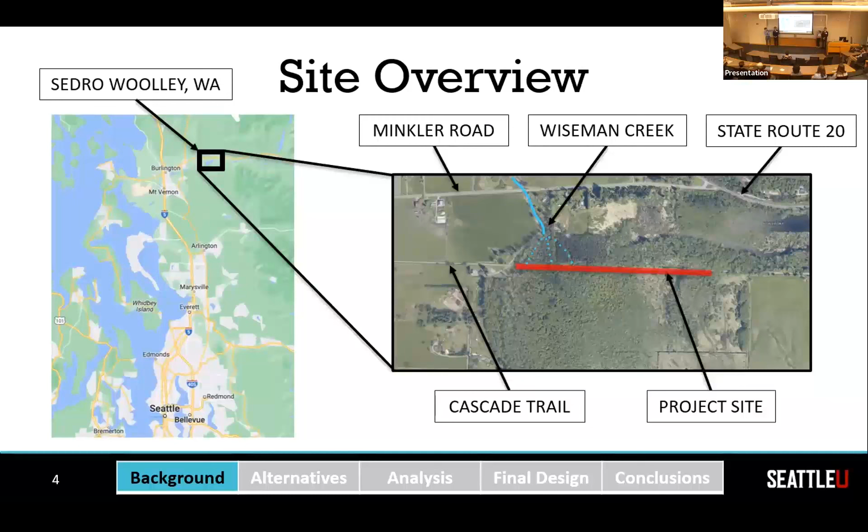So this is our site overview. So as you can see, it's near Sedro-Woolley, Washington, which is about an hour and a half north of here. And our project site is a 1,900-foot stretch of trail on the Cascade Trail. And Wiseman Creek, as you can see, runs through the Cascade Trail. And I'll talk more about that in the problem statement. And it's right by State Route 20 and properties on either side.

So these are our project objectives. So we analyzed literature and data to understand the problem. Then using that literature and data, we determined 4 final design solutions. We used an evaluation matrix to determine the best solution out of those 4, and then delivered 10% design drawings and a final report to our liaisons and Seattle University.

So this is our project roadmap. First, we had to understand the problem. Then we did a literature review and survey of the area. And in the literature review, we mainly focused on a 2006 feasibility study that went over our project site and talked about very similar things to what we were looking at. After that, we determined 4 potential solutions and created an evaluation matrix to find which one was the best. After we selected our preferred alternative, we made 10% design drawings of it and created a final report and deliverables for Skagit County and Seattle U.

So this is our statement of problem. So as you can see on the right, the trail is completely inundated with flow from Wiseman Creek. And when this happens, the trail is very inaccessible, and trail users either have to detour along State Route 20, which is a freeway, not too safe to walk along. They either have to turn back, which they complain about to Skagit County, or they continue through the flooded trail, which isn't preferred for the fish or for the trail.

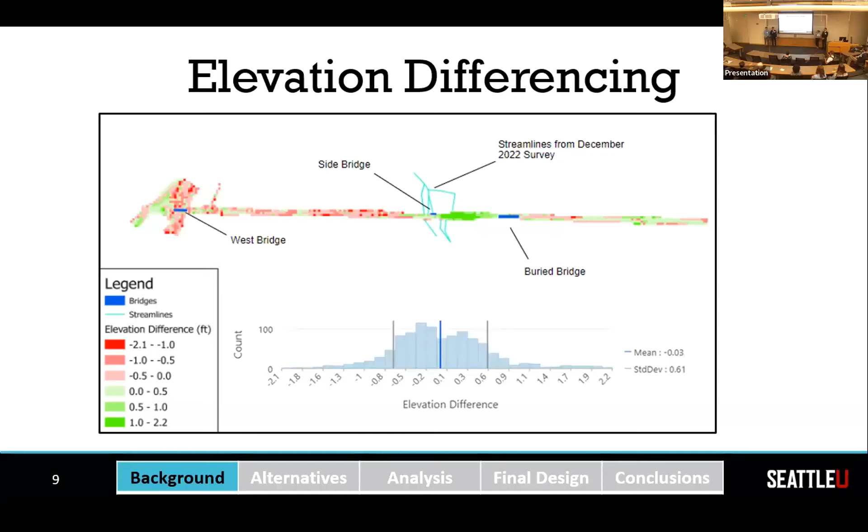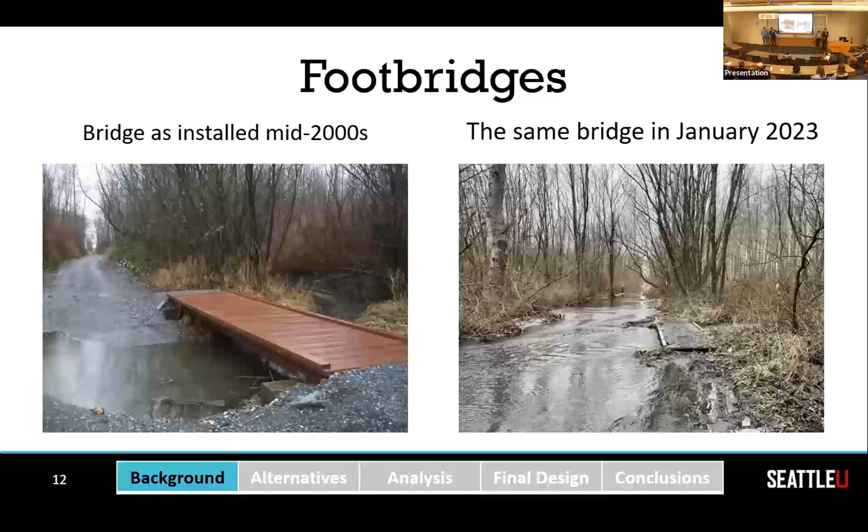And this is an example of that. So this bridge was installed in the mid-2000s. And at the time, it was an effective solution to cross this channel of Wiseman Creek. Now, when we came back in January 2023, that's that same bridge, and it's no longer providing access down the trail corridor.

So we came up with 4 proposed alternatives that could solve the problem. The first was no new action, just continuing as it is. The second is rerouting the trail. The third is raising the trail. And the last is a full boardwalk over the extent of the affected area.

So for the first alternative, we wanted to analyze the current state of the trail in order to compare our other alternatives to it. So this involves leaving the trail as it is, doing the maintenance that Skagit County currently does every summer, which involves regrading almost that entire section of trail. And trail users are detoured onto State Route 20 if they want to go around the trail. The habitat disruption from Wiseman Creek being channelized along the trail and from trail users moving through the sediment would continue to exist under this circumstance.

The second option we looked at was rerouting the entire trail to avoid the affected area. And this would involve going up onto Minkler Road and then either coming across on Highway 20 before cutting back to the trail or staying above the wetland area, but not on Highway 20 and coming back to the trail. This would require acquiring land or the ability to put a trail through there. And that was deemed difficult.

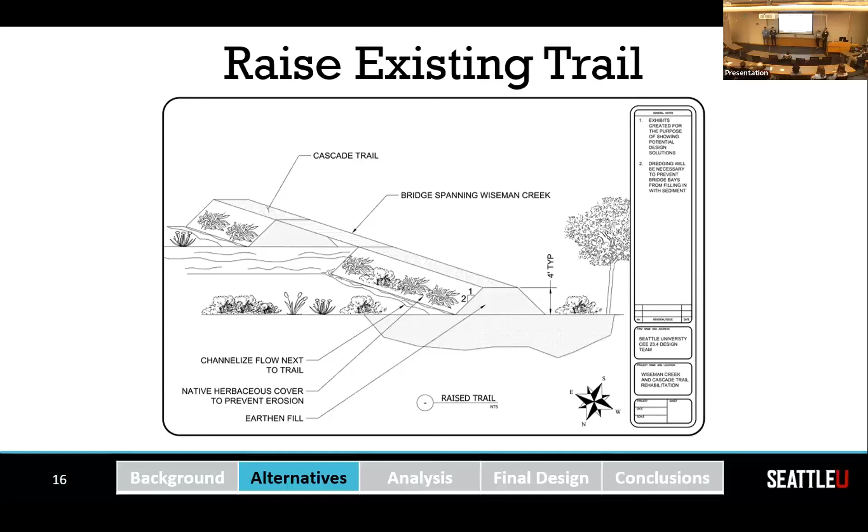The other option we looked at was raising the trail. Now this would involve bringing in soil to fill the area and bring the trail's elevation above both the sediment deposition over time and floodwaters, and creating certain channels with bridges over them that the creek could move through. There are issues that come up with channelizing the creek, and that's one of the problems that the salmon habitat is facing currently. So this solution doesn't necessarily solve all of the habitat problems.

Great. So now that we've talked about all of our different design alternatives, it's time to evaluate them. And we did this by using an evaluation matrix that has 6 different criteria on a score from 1 to 5, with 1 being a low score and 5 being a high score. So now we'll talk about some of those criteria. Constructability is our first criteria. Here we really want to make sure that whichever design alternative we select is easy to construct and doesn't require excessive land acquisition, any excessive heavy machinery, or extra support from exterior contractors.

Next up, we look at recreation and Zoom notification. Sorry about that.

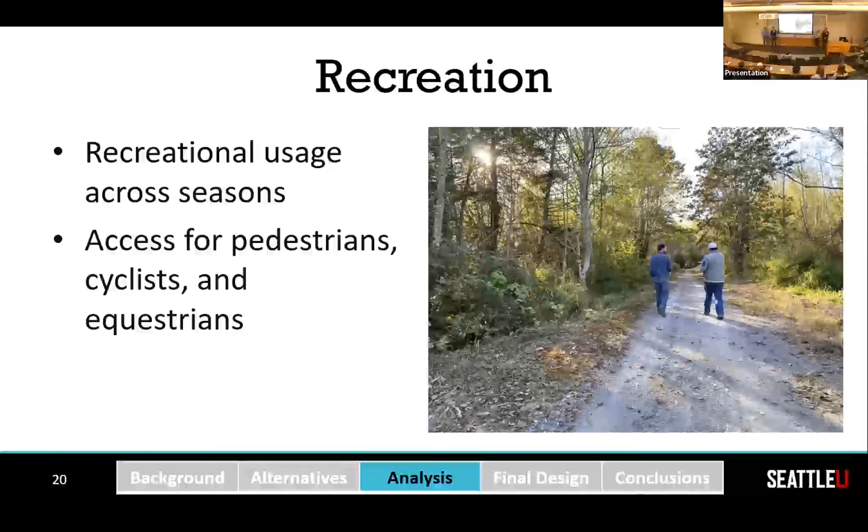Next up, we look at recreation, and here we want to make sure that the trail is accessible to all of our trail users, which include pedestrians, cyclists, and equestrian users. And we want to make sure that these trail users have access all year round. Next up, we're looking at environment. And here we want to make sure that we're restoring the Wiseman Creek alluvial fan region to its natural hydrologic functions. So one of the ways we can do this is by separating the trail and the wetland habitat.

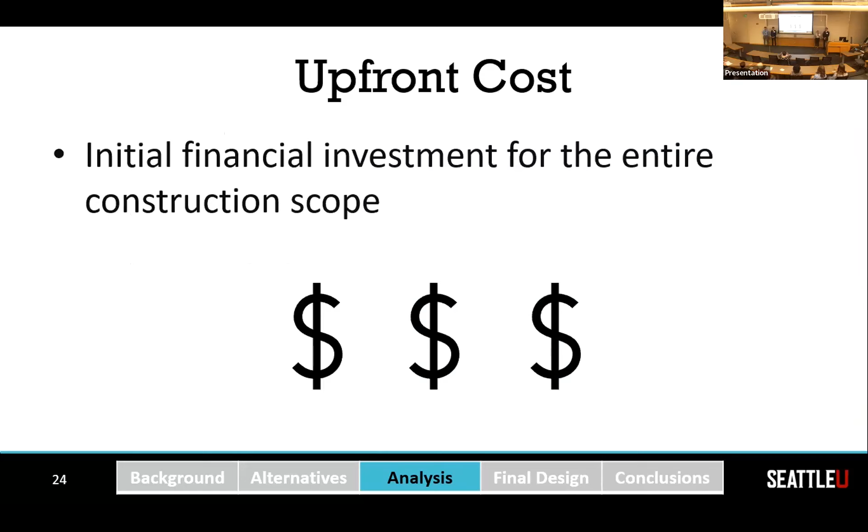Next up is longevity. And here we're looking at any expected future maintenance costs and also the expected lifespan of any of our designs. Then we have permittability, and this refers to the ease of obtaining permitting from any local, state, or federal government agencies. And finally, we have upfront cost, and this criteria refers to the initial investment required to actually build our design alternative.

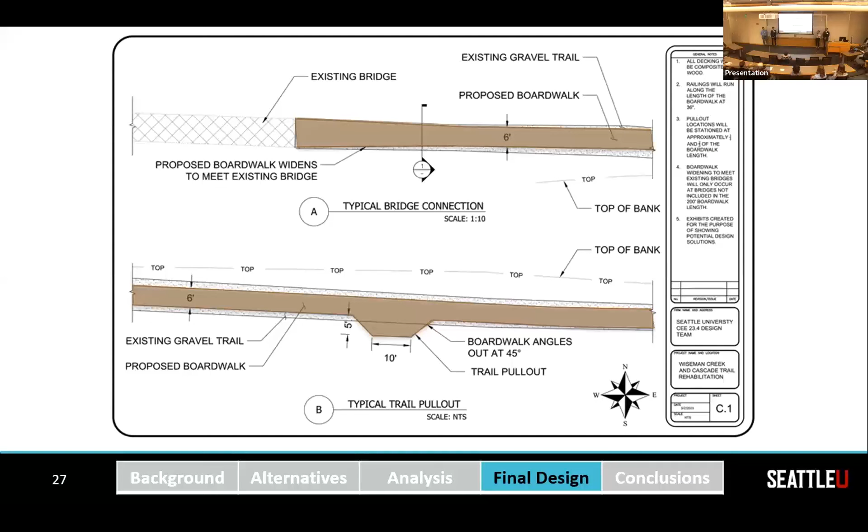So now that we've talked about some of our criteria, let's look at our design components. On the board here, you'll see the full length boardwalk, which we plan to be 6 feet wide, 1,900 feet long, and to have about a 30-year lifespan. In this plan view here, we considered a couple of design constraints, one of those being existing bridges that exist on both west and east ends of our proposed boardwalk. So to address this concern, we proposed that the boardwalk widens to meet the existing bridge.

Another concern we had is 2 equestrian users passing each other on our 6-foot wide boardwalk. We're not quite sure if they'll be able to squeeze past each other. So to address this, we had pullouts at 1/3 and 2/3 of the length of the boardwalk. That way equestrian users can pull off to the side and let each other pass safely. Next up, we'll look at a profile view.

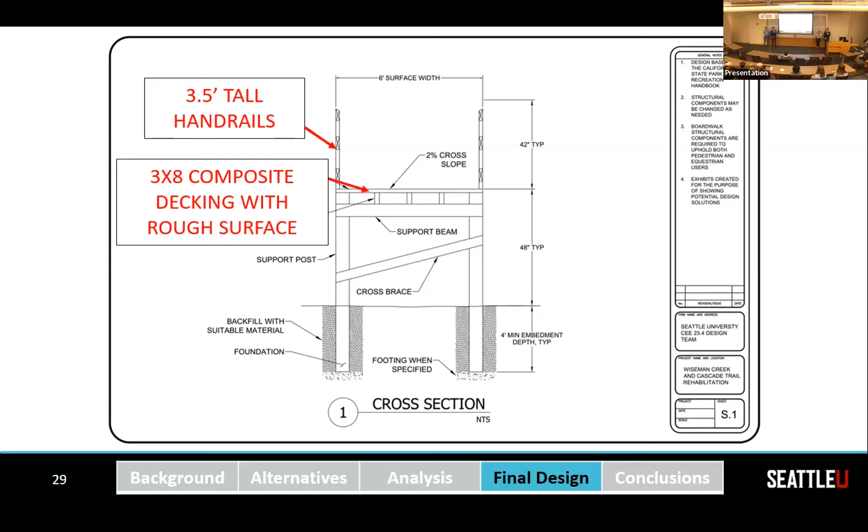And when we zoom into those supports and look at this cross section, you'll notice that we have 3.5-foot tall handrails for pedestrian safety. And we plan to use 3x8 composite decking that's rated for equestrian use and also has tractioning over the top. The roughening surface or traction is to prevent slipping during the wet season. And the rating for equestrian users just means that any equestrian users walking along the boardwalk don't have to worry about their horse's hooves punching through the deck. So that's important for safety as well.

You'll also see that we call out a 2% cross slope, and this is to help Skagit County Parks and Rec with any of their maintenance. So now that we've talked about some of our design components, I'll pass it off to Ryan, who'll talk about benefits.

So as we've recapped our design here, we look at the overall benefits for the environment. We looked at it mitigated the human impact on the salmon habitat, and it also allows the alluvial fan to function naturally. For recreational use, this provides year-round access throughout the trail corridor for pedestrians, cyclists, and equestrian users, and it prevents users from needing to detour around to Highway 20, which is a safety concern.

Additionally, this solves a long-standing issue within Skagit County. The feasibility study we talked about earlier was conducted in 2006, and there was no preceding action. So this has just been a lingering problem that we were hoping to solve here.

So now to look at how much this thing costs, we looked at 32 observations of other wetland design boardwalks. We then found an average cost of $710 per lineal foot, which we applied to the full length of our boardwalk, which gives us this cost of $1.4 million. After applying a 30% contingency, we then see an estimate of $1.8 million.

As for maintenance cost, the current trail conditions that Skagit County is doing is requiring about $9,700 per year on average to just brush the trail and regrade it, which they do every year. With the addition of the boardwalk, this then changes to $11,400. However, there is no more need for the trail to be regraded as people are just walking over the top of the wetland.

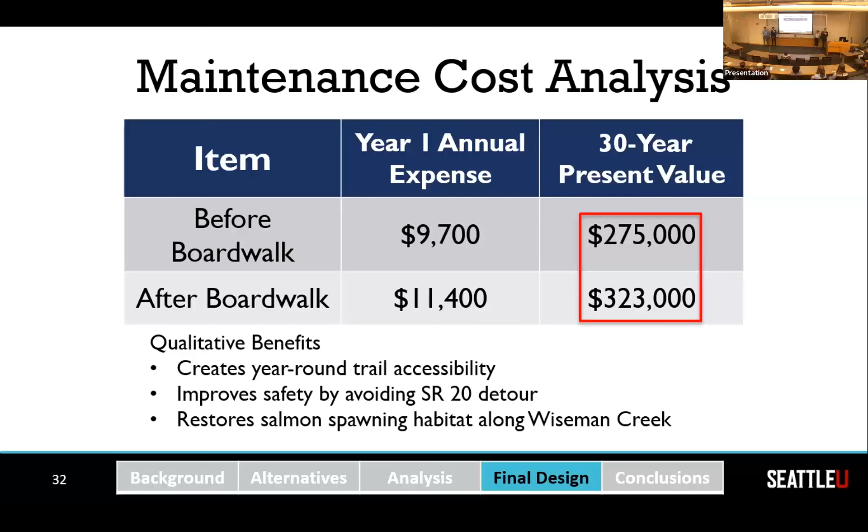Our 30-year present values are shown here. So before boardwalk, we are looking at $275,000. And then afterwards, this increases to $323,000. Now, these numbers do not reflect the qualitative benefits that we do get from having the boardwalk, which are the recreational benefits of having year-round accessibility along the trail corridor, as well as improving the safety by avoiding the State Route 20 detour. And finally, ideally restoring the salmon spawning habitat along Wiseman Creek.

So for further development, we have delivered this to Skagit County to aid in the acquisition of grants and other funding to accompany the cost of the boardwalk. We then had discussions with their liaisons about working with potential partners such as Washington Trails Association, Skagit Trail Builders, and Skagit Whatcom Island Trail Maintenance Organization to help reduce the cost. And furthermore, we looked at potentially making this trail an adopted trail, which would also help to alleviate some of the additional maintenance cost. And that is all we have.

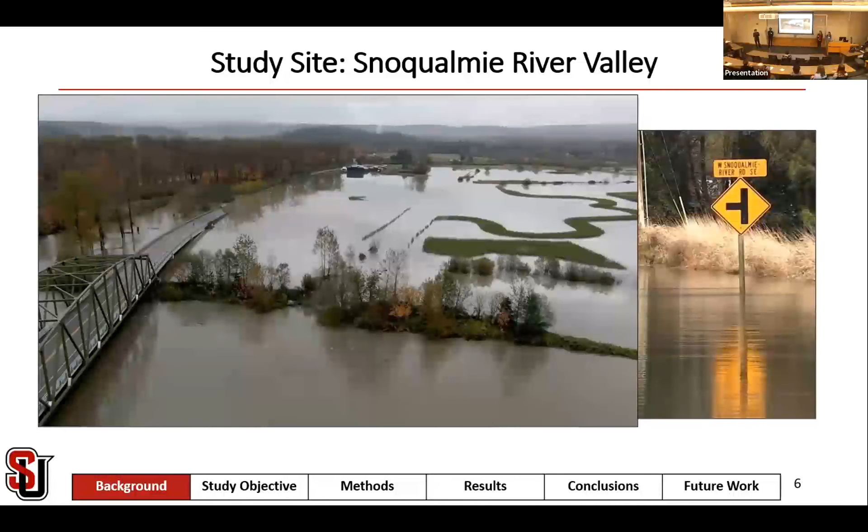While this is really useful information for users, it does have its limitations, as flooding information is only available at gauge locations, meaning that users who do not live right next to a gauge may have a difficult time discerning how a flooding event is going to affect their property and their livelihood.

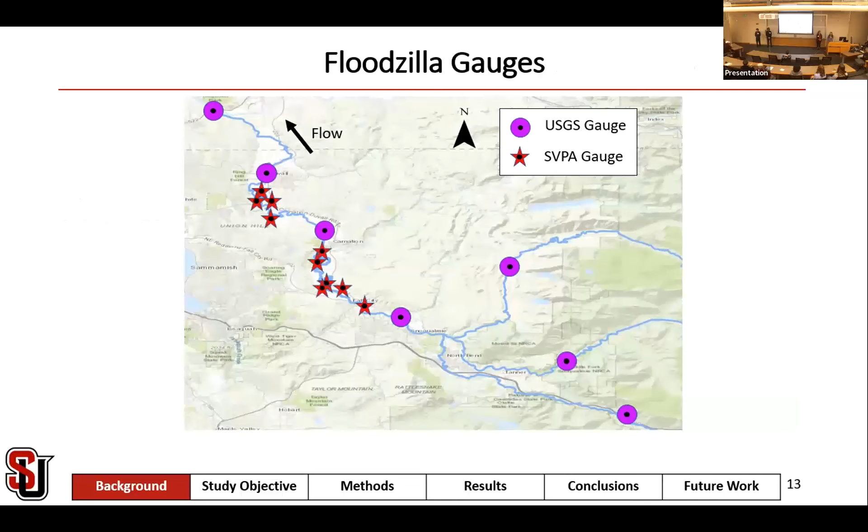Thank you, Ruby. And SVPA uploads water level and flow rate data from 7 gauges, which are owned by the United States Geological Survey, or USGS. In addition to that, SVPA also owns and operates a series of 10 active gauges, which utilize ultrasonic technology to record water level in the valley.

Currently, SVPA has a preliminary screening algorithm, which will flag and remove data points when the water level is recorded to change at a rate above 2 feet per hour. SVPA defined this parameter based off their observations that water level readings recorded at their gauges typically do not exceed this rate. Although this screening algorithm has helped SVPA to flag data, it does not adequately capture erroneous readings caused by an obstruction between the gauge sensor and the ground surface, such as a tree log, spider webs, or Seattle University students on site, as you can see pictured.

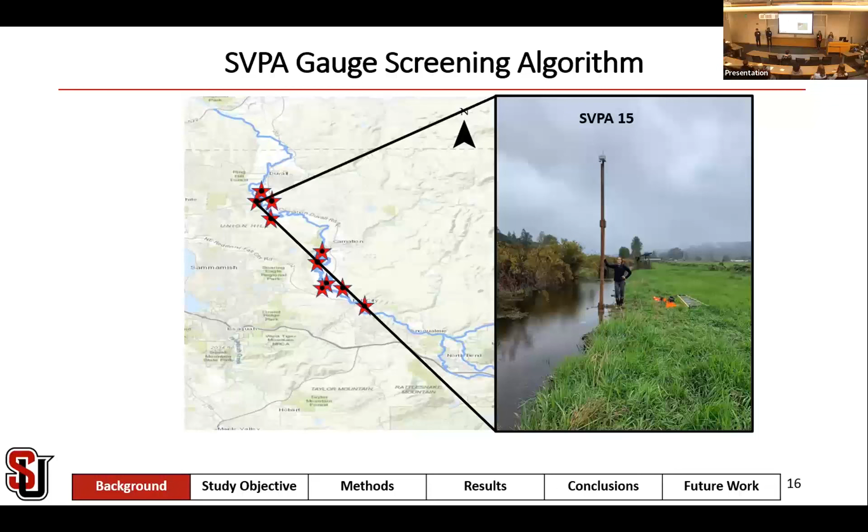Furthermore, there is evidence of valid water level readings which change at a rate above 2 feet per hour, such as when a flood crests and flows quickly into a drainage ditch, which is often the case for our SVPA 15 gauge.

For the screening algorithm, we implemented 3 parameters from USGS, first of which being range, or checking whether or not a given data point falls within the natural boundary for a gauge. Second of which being rate of change with minimum and maximum values. And third being consistency checks with adjacent gauge readings. Sean will now go into a bit more detail in the coming slides about how this all works.

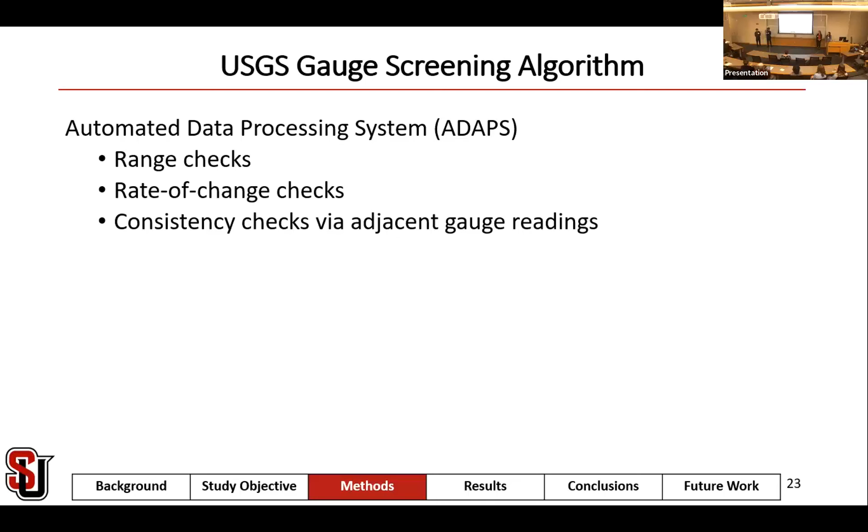So as Owen mentioned earlier, we will be implementing USGS's 3 methods of screening their data onto our sponsors' gauges as well. Here we have a rough outline of the flow chart that our algorithm will seek to take, and we will be explaining the particulars of it in the slides to come.

Here we have the 3 basic parameters that we will be implementing, starting with a check for minimum and maximum water elevation checks for the gauge's historical readings. When a point passes through that parameter, it is then checked to see if it lies within the minimum and maximum rate of changes that we've established at each gauge. If it passes that as well, then we will compare it to an upstream USGS gauge to make sure that our sponsor's gauge readings make sense in the context of the whole river.

When a point succeeds in passing through that parameter, we then go into the minimum and maximum rate of change checks. For our maximum rate of change, we have decided to keep our sponsor's existing 2 feet per hour parameter as our maximum, as it is historically proven to capture erroneous data without capturing too much publishable data as well. For our minimum rate of change, we will be selecting to look at data points that represent a rate of change of 0 feet per hour from the previous point.

Therefore, to effectively compare the 2 gauge readings, we had to determine the average time lag between when a max stage is recorded at both gauges, which we denote as delta T, as well as the average height difference between peak stages at both gauges, which we denote as delta H, which is due to the difference in datums that the gauges have. We calculated delta H and delta T values based on a variety of flood magnitudes to ensure we had representative parameters of multiple flooding events. After which, we shifted up our USGS gauge based off the delta H and delta T parameters to create what we like to call an SVPA predicted value. Now, all incoming stage data will be compared to this SVPA predicted value.

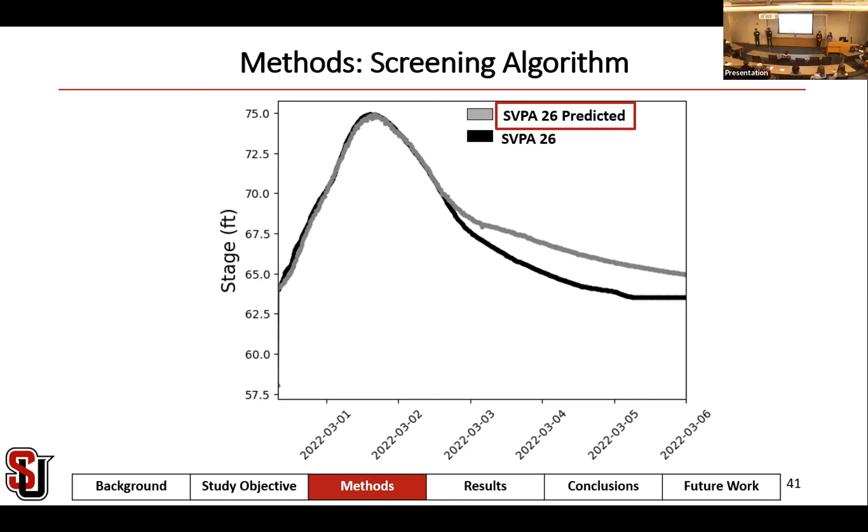So going into the methods for our inundation map development, we'll be using ArcGIS to compile a HEC-RAS water surface elevation map and subtracting from that a LiDAR ground surface elevation map so that we can make a more defined river depth map for any given flood event. Ruby will now go ahead and explain how we went using HEC-RAS in this project.

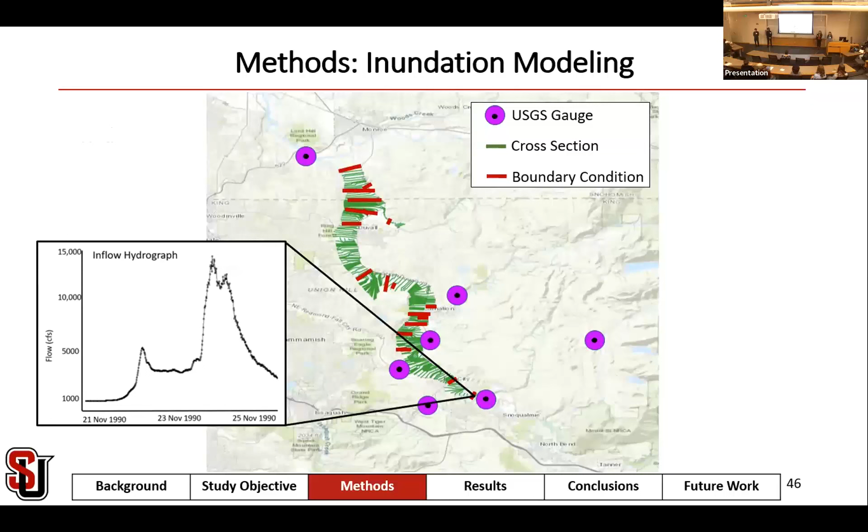Each of these boundary conditions requires an input hydrograph, either an inflow hydrograph, as shown here, which shows flow data from USGS in respect to time, or alternatively, a stage hydrograph, which shows stage data in respect to time. Now, when the model was originally created for these 21 boundary conditions shown here, the necessary stage and inflow hydrographs were determined using data from these 7 USGS gauges. However, since 2004, 2 of these gauges have gone offline. So in order to rectify that, we've gone ahead and added an additional gauge, the USGS 22 Carnation gauge. So now when we run the model for these 21 cross-sections shown here, the necessary stage and inflow hydrographs are created using data from these 6 USGS gauges.

The floods that we modeled in HEC-RAS have been used to create inundation maps or flooding maps. And those flooding maps have been compiled into an inundation map library. We reference these maps to the flow recorded at the USGS Carnation gauge. We chose this gauge because it is midpoint between the upstream and downstream boundaries of the Snoqualmie River and has historically experienced the highest inflows.

Many of the floods that we modeled have been based off historical and frequency analysis, based off the annual peak flooding events that have occurred at the USGS Carnation gauge. We use that frequency analysis to create 1 through 100-year return flooding events. We have also modeled in HEC-RAS historically large flooding events that have occurred in the valley, which SVPA has uploaded onto their Floodzilla website.

Now we will go into our results. For the screening algorithm, we performed a correlation analysis on the SVPA and SVPA predicted hydrographs. We found a very strong relationship, especially above the minimum stage values. Now we performed this for each gauge, and we can use this to prove how we're able to check consistency against adjacent gauge readings using this relationship.

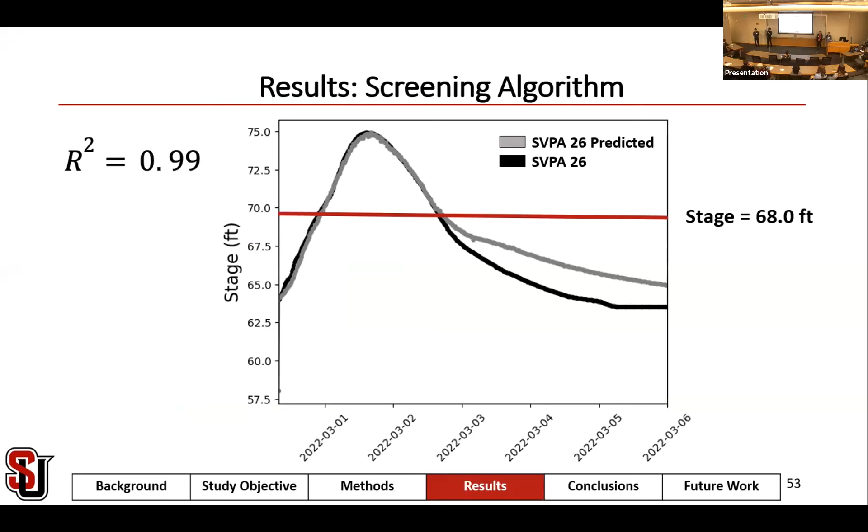This makes up roughly 40% of SVPA 25's flagging efforts. So we are happy to be able to provide that much reduction in our sponsors' workload.

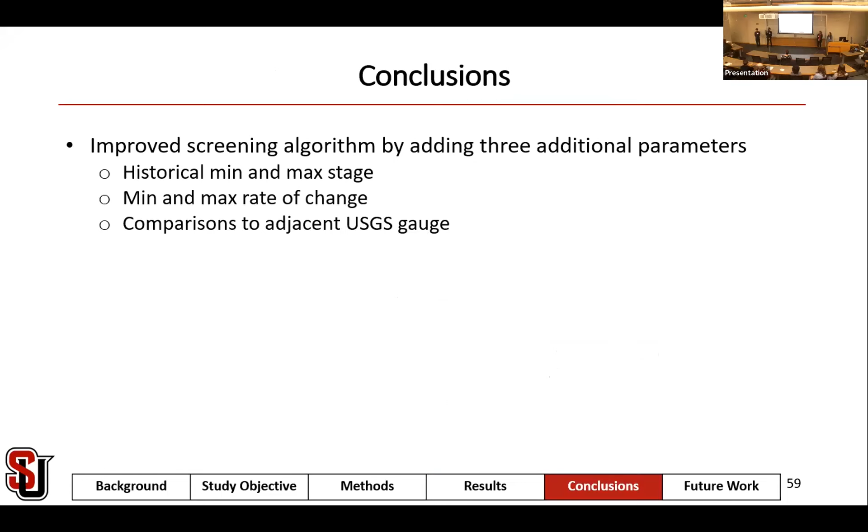In conclusion, we have improved the automated screening algorithm for SVPA by implementing 3 additional parameters, including historical minimum and maximum values, minimum and maximum rates of change, and consistency checks with adjacent USGS gauge readings. In addition to this, we have also provided a way to visualize flooding events to residents in the Snoqualmie Valley through the creation of inundation maps, which display the extent of flooding events. And we have developed a script to make it easy for SVPA to implement this in an automated process.

And now moving into future work, in 2017, King County adopted the 1D HEC-RAS model that we use throughout this project. In the spring and summer months of 2023, King County is working on developing a new 2D HEC-RAS model of the Snoqualmie River. This new model would include updated topographic surveys and hydraulic analysis. We bring this up as we think it's important to know that the methodology that we have developed throughout this project can still be applied to this new 2D model. This would allow SVPA to create new and updated flooding maps to be displayed on the Floodzilla site.

Sweet. Thank you, and now I think we have some time for some questions.

One question I had was on the flooding mitigation map. Was I understanding that you took a gauge kind of in the middle of the valley and applied that to the HEC-RAS model from downstream to the upstream end? In other words, does that consider the floodways, the rising land, falling land?

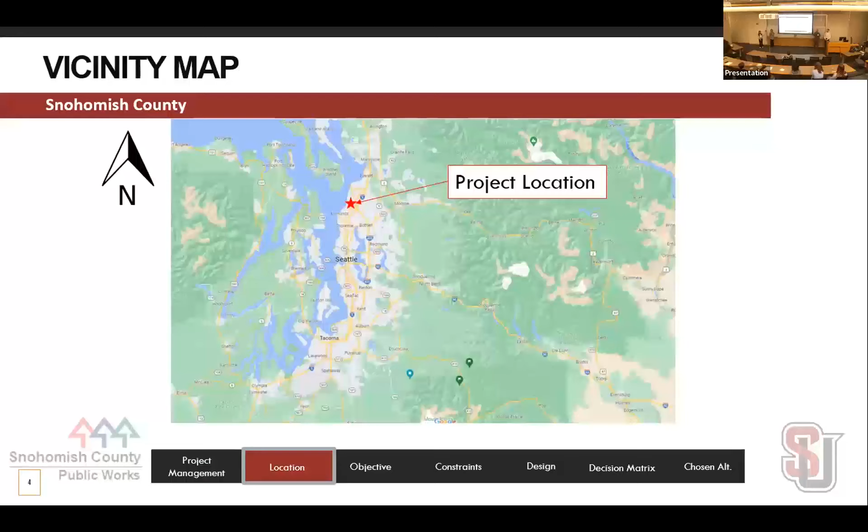Here's a picture of our project site, which spans about 600 feet between 164th Street Southwest at the north end and Lynnwood city limits at the south. This roadway leads access to amenities and buildings, including Meadowdale Townhomes, St. Timothy Lutheran Church, which is also a preschool, Sunquist Family Nature Park, and Beverly Elementary School.

And at the south end of our road, it features an earthen dam as well as a regional detention pond. So this part of road is actually built on top of a berm. Right under the road, there's also Lunds Gulch Creek, which flows through a culvert in this section of road.

Our project objective was to provide Snohomish County with a preliminary pedestrian improvement plan for 52nd Avenue West to address the lack of pedestrian facilities on the west side of the road. And this will include 4 different design alternatives, including one no-build option, as well as the selection of a preferred alternative based off of Snohomish County's recommendations and our engineering knowledge.

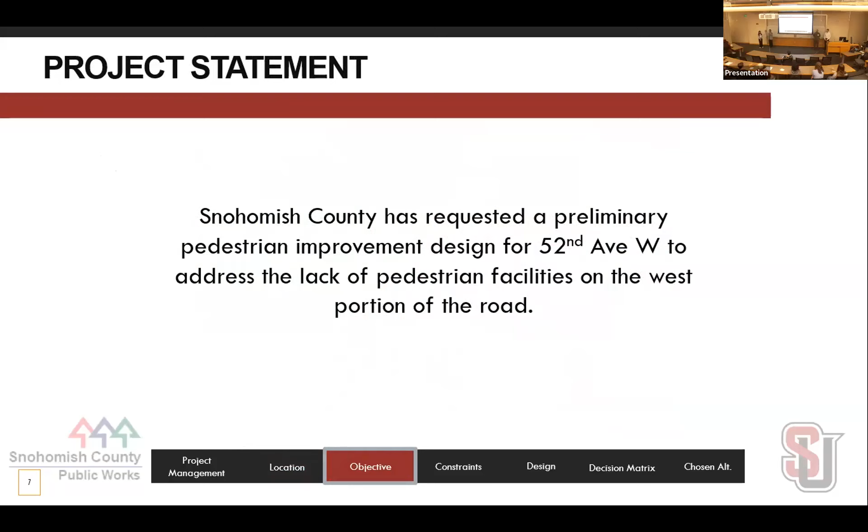So here's our project site again. 52nd Avenue is classified as a minor arterial road, which is characterized by a posted speed of 35 miles per hour and medium to high vehicle capacities. So here are our current conditions. Right outside of our project site is where the sidewalk ends pretty abruptly at the north and south end of our project site. So this would leave just the west shoulder for both pedestrians and cyclists to travel through, along with oncoming traffic.

Some limitations we need to consider in our project include the earthen hill along the Sunquist Family Nature Park, where this hill is only allowed to be excavated within right-of-way limits to create enough space to construct a pedestrian facility. Another constraint we need to consider is the culvert near Lunds Gulch Creek, which exists 20 feet below the existing shoulder, and this area must remain undisturbed as much as possible.

The third constraint we need to consider is the earthen dam, located at the southern portion of the site, which is part of the Lunds Gulch Regional Detention Pond, and this area must remain undisturbed as well. As for our project scope, we'll have to deliver a 30% design report to develop a pedestrian improvement plan with 4 design alternatives, which is a culmination of all of our tasks and deliverables we've been working on this past year.

As for our basis of design, we utilize the Engineering Design and Development Standards, the Washington State Department of Transportation, and the American Association of State Highway and Transportation Officials to comply with all design standards for drainage, utilities, pedestrian facilities, and wall designs.

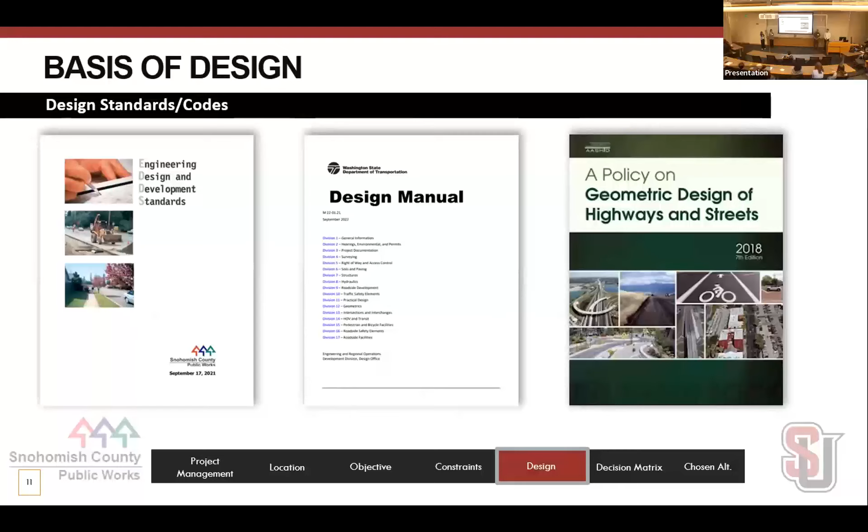Title VI applies to inform everyone within the community, to accommodate the needs for the Americans with Disabilities Act, non-English speakers, and to provide environmental justice.

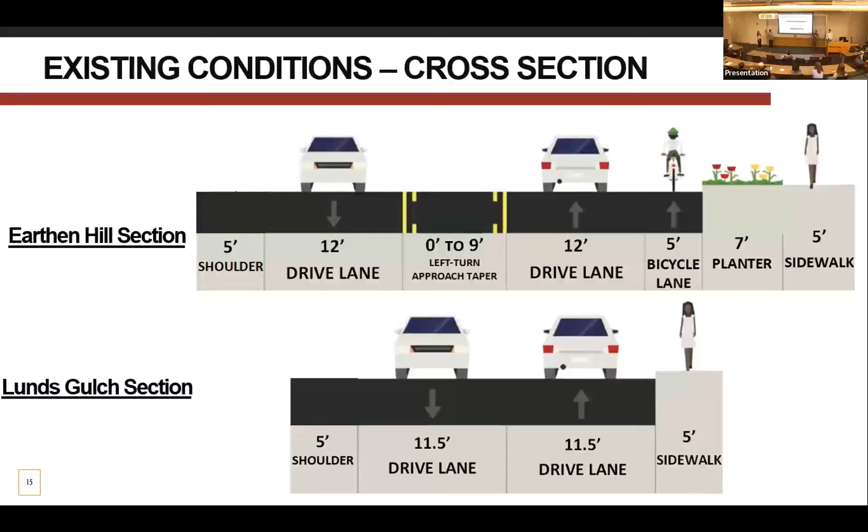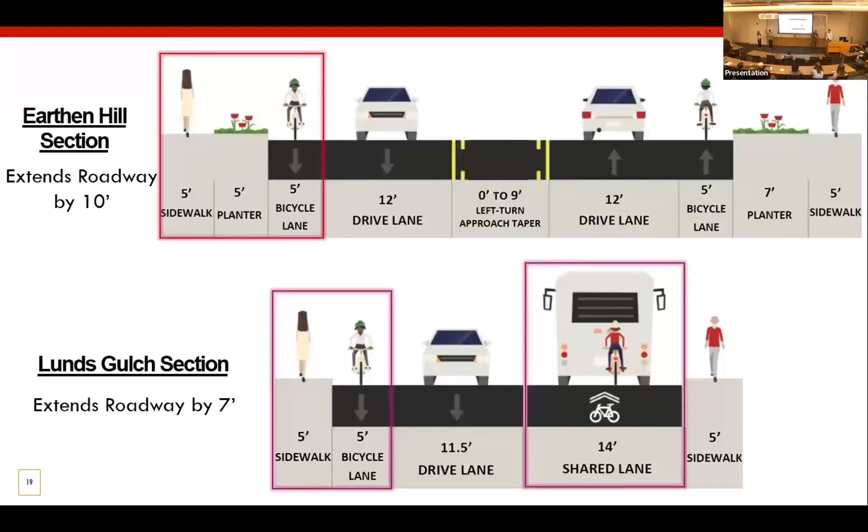For alternative three, it's very similar to alternative two, except on the east portion of the roadway, we'll be adding this bicycle facility that starts at the Lynnwood city limits. So as soon as bicyclists enter Snohomish County, they'll be able to enter a designated bicycle facility all the way heading northbound. And then on the east portion, we'll still have that bicycle facility. So a bicyclist could come from 164th Street all the way to Lynnwood City and to Beverly Hill Elementary School.

And then also we would have that bioretention planter strip between the sidewalk and the bicycle facility at the Earthen Hill section. And then the sidewalk will continue all the way to Beverly Hill Elementary School.

And then this is the alternative three cross section. So for the Earthen Hill section, we'll be replacing the shoulder with a bicycle lane, planter strip, and sidewalk, extending the roadway by 10 feet there. And then at the Lunds Gulch section, we'll be adding a 5-foot bicycle facility on the east side of the roadway. And then the shoulder on the west side, we'll be replacing with the sidewalk and bicycle lane. And then we'll extend the roadway by 7 feet.

So for our fourth and final alternative, this is going to be our no build option. Basically the project site will remain as is. However, this will not meet any of the requirements set forth by Snohomish County to add a pedestrian improvement plan for the west portion of the roadway.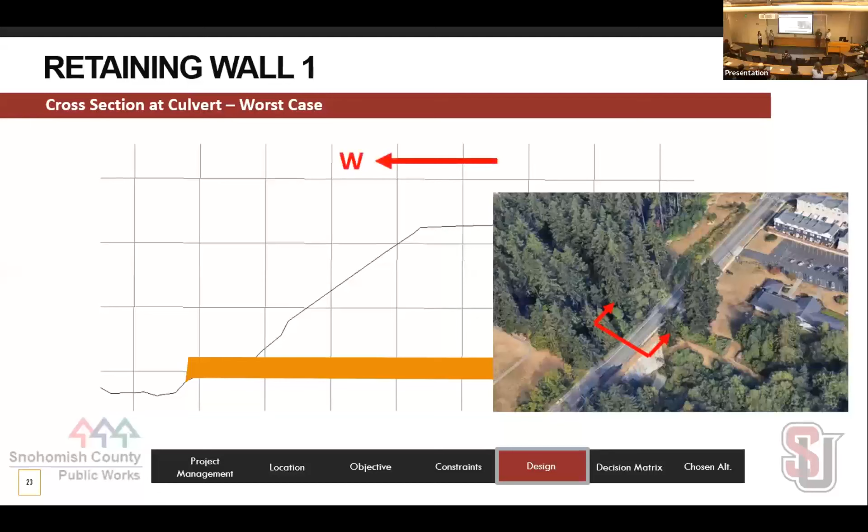Thank you, John. This is an existing roadway cross section at the Lunds Gulch Creek area. And in order to provide improvements to the west side, we will have to go over that existing slope that's there. So we propose adding a geogrid reinforced wall to mitigate the impacts on that culvert and the Lunds Gulch Creek that flows through that culvert.

So that will require a partial excavation of the hill and then construction of a geogrid reinforced wall with geogrid reinforcing in between the layers. And the improvements will be built on that geogrid reinforced wall, and it will be a 6-to-1 slope. And this is a photo of approximately how the wall will look after it's constructed.

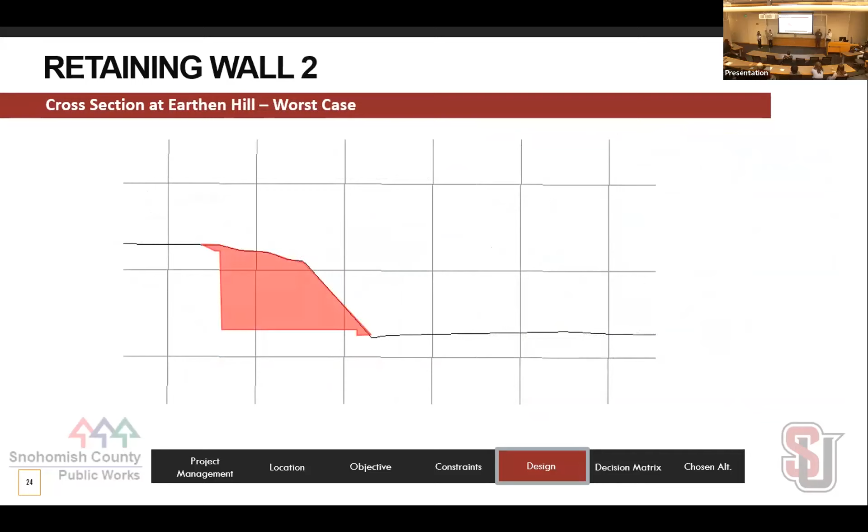So our team created a decision matrix tool to select a preferred design alternative for a pedestrian improvement plan, which is based on 5 categories, and that includes environmental impacts, cost of improvements, pedestrian and bicycle facilities, and meeting standards from the county's minor arterial cross-section.

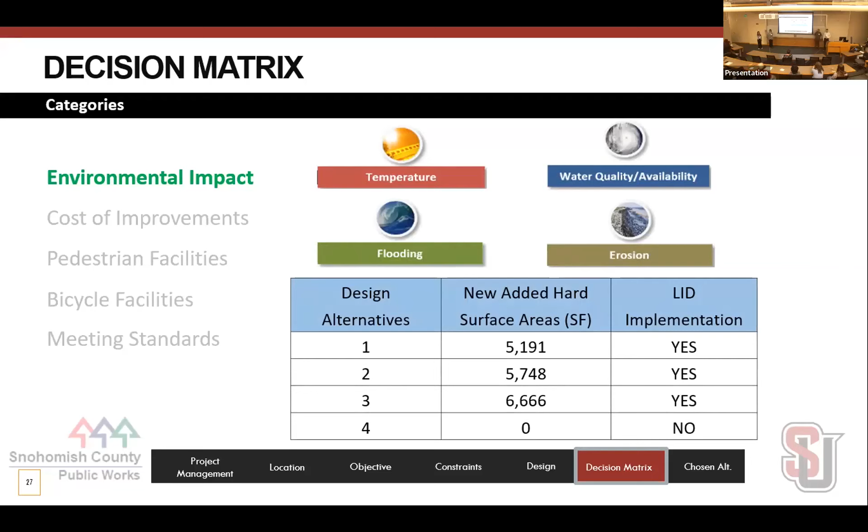And to analyze environmental impacts, we utilized the climate change tool to examine changes in temperature, water quality, flooding, and erosion impacts. The climate model projects an increase in temperature, stream flow volume, sea level rise, and landslide hazards. And based on this table, design alternative 3 has the highest amount of new added hard surface area, where low impact development best management practices will be implemented to minimize erosion impacts.

For the cost of improvement section, we utilized the Washington State Department of Transportation unit bid analysis, which basically looks at historical prices of construction items that WSDOT used in past projects. And with this cost analysis, we found that alternative 1 will cost $1,244,000. Alternative 2 will cost $1,326,000. Alternative 3 will cost $1,416,000. And alternative 4, which is our no build option, does not have any costs associated with it.

For our pedestrian facilities, we looked at the number of pedestrian facilities added and also the separation from the roadway of those pedestrian facilities. For the bicycle facilities, we looked at the number of bicycle facilities added and also the separation from the traveling roadway of those facilities. For the meeting standards category, we just looked at the number of deviations from the standard minor arterial county cross-section that we looked at before.

So with this, we developed a decision matrix. It's a lot to take in, but you can see alternative 3 comes out on top. This is our alternative with the sidewalk, the planter, and the 2 bicycle lanes. And it scored the highest because it has the most pedestrian facilities, the most bicycle facilities, and it meets the most standards. And although it does have a higher environmental impact, there's not much difference between the other 2 alternatives in terms of environmental impact.

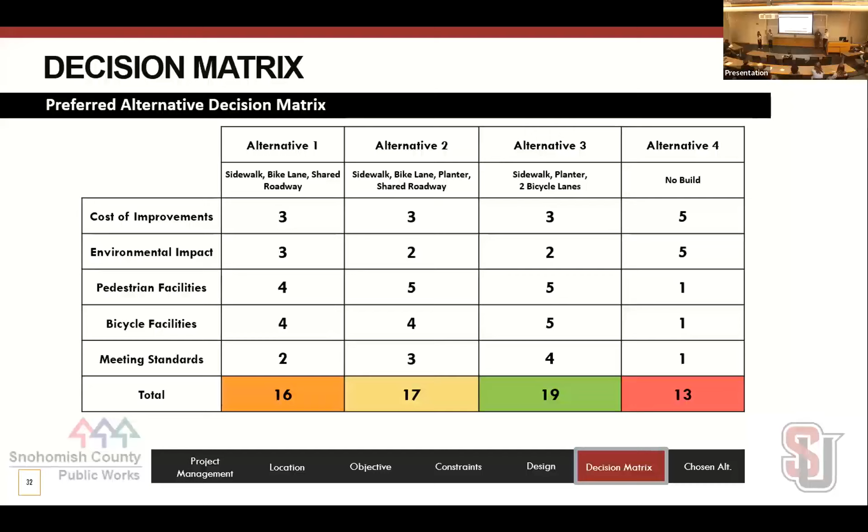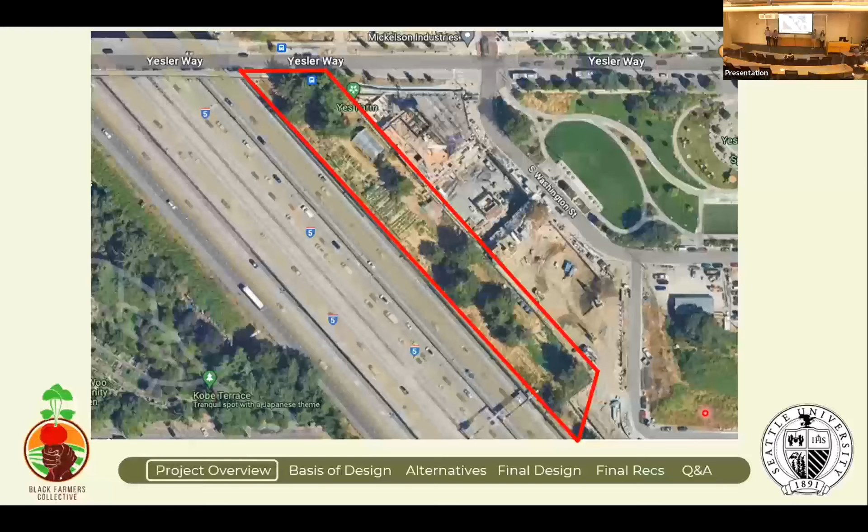In terms of the existing conditions of the farm, they currently have an 1,100 gallon cistern at the very north end of the farm, which is getting the water for free twice weekly from Seattle Parks. However, this will change later this year to a paid connection from Seattle Public Utilities. Additionally, they're storing their rainwater collected from the greenhouse in a 1,500 gallon cistern and the rainwater collected from the tool shed in a 1,400 gallon cistern. They additionally have 6 2,500 gallon unused cisterns at the southern end of the farm.

And their water that they have on site is used to hand water both the beds that are planted in by the community and controlled by Yes Farm. And that hand watering is very labor intensive and not very water efficient. Okay, going over our project goals. So we characterize the existing conditions of Yes Farm, also calculating the water demand while maximizing the amount of rainwater that can be collected. Then we developed the water distribution system, also known as the irrigation system, thus reducing the amount of manual labor that's needed on the farm.

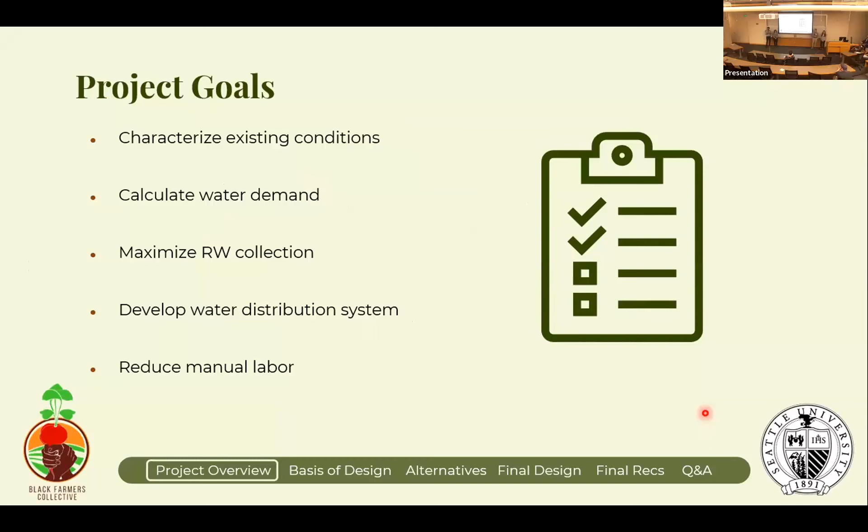For our basis of design, we use Seattle Public Utilities and the Uniform Plumbing Code. Seattle Public Utilities was used to help calculate the cost of SPU water that will be needed for the farm, also to help calculate the amount of rainwater that will be collected on Yes Farm, while the Uniform Plumbing Code was used to help develop our irrigation system.

So going over our 3 alternatives that we came up with, our first alternative is to continue using the existing cisterns on site with the addition of SPU water. Our second alternative is to continue using the existing cisterns while also connecting them to the 6 unused cisterns on the southern end of the farm, and also using a pump to help direct the water to our irrigation system. And alternative 3 is to build off of our alternative 2 while also adding extra rainwater collection over the 6 unused cisterns on the southern end of the farm.

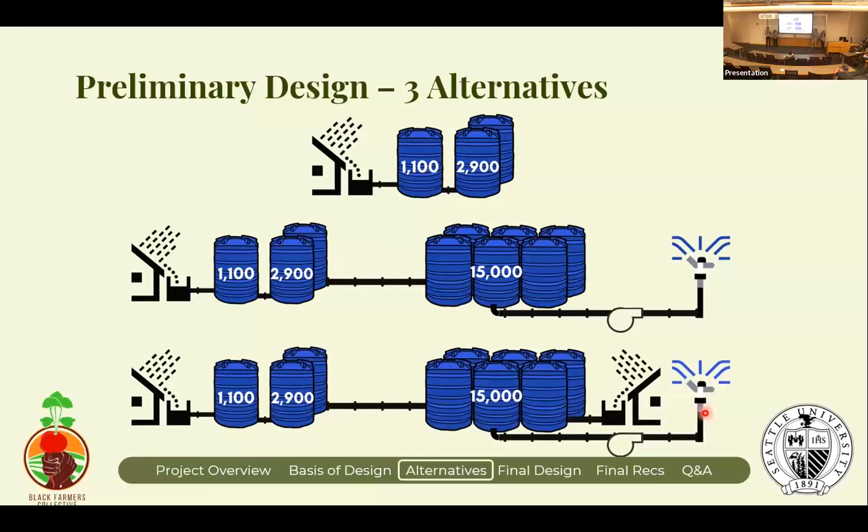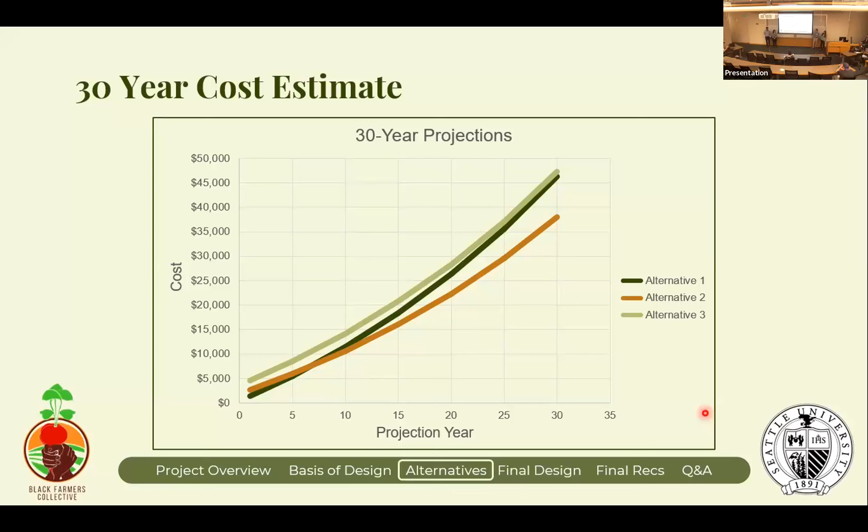With alternative 3 being chosen, we could see that there's an increase of over 500% of water storage on the farm, while also an increase of 38% of rainwater collected, while there's a decrease of 22% of SPU reliance on the farm.

Taking a deeper look at our final design, we have the SPU water connecting directly to our northernmost cistern. We are continuing to collect rainwater from the roofs of the greenhouse and the tool shed and storing that in their respective cisterns. We will be adding the additional structure above the 6 southern cisterns, which will increase our rainwater collection area, and all of that water will be directed into the 6 cisterns, which are also connected at the base. We will then have an underground conveyance pipe connecting all of the cisterns and directing water towards the 6 southern cisterns. We will then have a pipe coming out of those cisterns, feeding into a pump, which will supply the water to our irrigation system at the center of the farm.

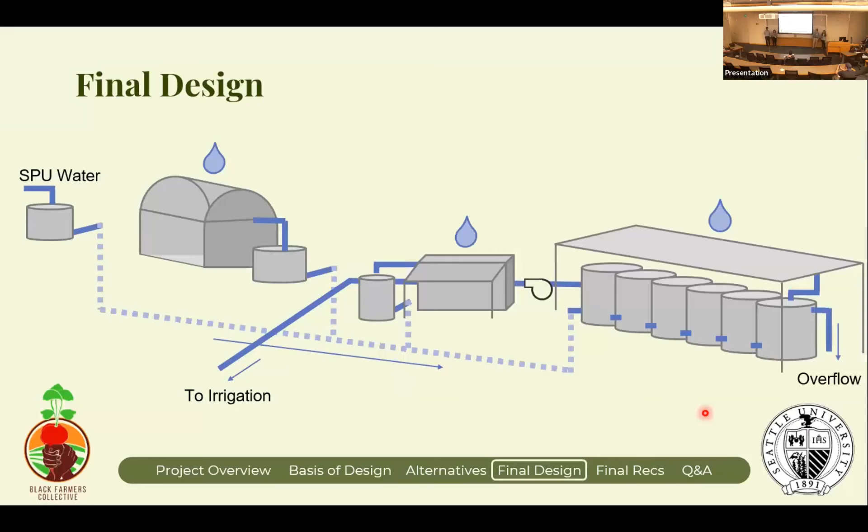And lastly, we will have an overflow pipe coming out of those 6 cisterns for any water that exceeds our capacity, and that will be directed directly to an existing detention pond on site. So here now you can see a plan view of our proposed irrigation system.

So these 3 boxes make up the main planting area on Yes Farm. And we plan to install around 900 feet of pipe, as Juliana mentioned, underground. And this will be coming from the 6 southern cisterns, and it'll travel through the pump and then distribute throughout the plots. And at each of those connections along that main line, there'll be a shutoff valve located for the farm's convenience. And throughout these plots, we will have our chosen irrigation method, which are wobblers.

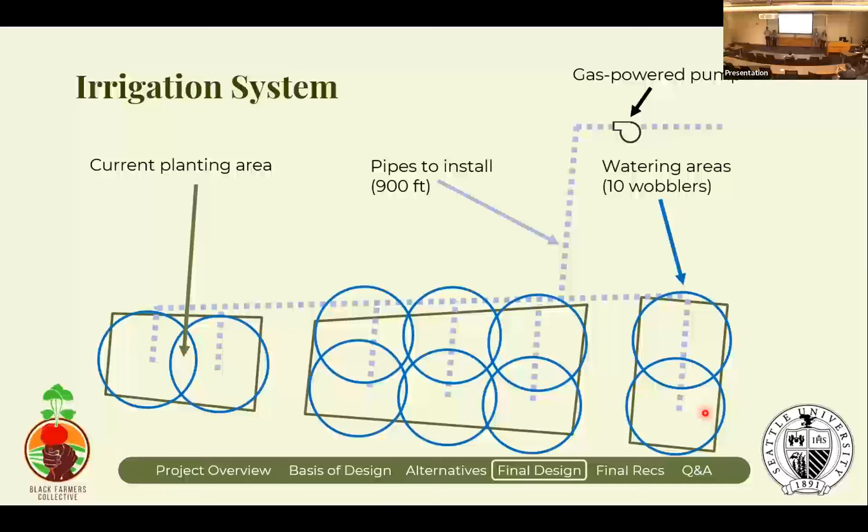In terms of the impacts of our project, it will positively impact the environment by helping to reduce runoff, which will help to reduce the risk of subsequent CSO or combined sewer overflow, which happens during high rain events when the sewage system is overwhelmed and sewage flows into water bodies such as the Puget Sound. So we want to reduce that as much as possible. We also help to conserve potable water as we're maximizing our use of rainwater for irrigation.

Economically, we help to reduce the cost of water for the farm, which allows for funds to be directed towards new programs as well as other improvements on the site. And we also potentially increase their crop yield by allowing for more efficient water usage.

Socially, our project will help to reduce the manual labor on the site needed for the upkeep of crops by both community members as well as farm workers, which will increase the accessibility of the farm, especially for those that may not be able to participate in those more labor-intensive tasks. We'll also be creating new opportunities for Yes Farm to educate the public on both rainwater harvesting practices as well as sustainability overall.

Now, with our design complete, there are a few considerations to keep in mind as this project potentially moves towards construction. First of all is the fact that while SPU water is potable, collected rainwater is non-potable water, and that should be signified on site depending on where those things are stored. Additionally, the fact that wobblers have a circular watering area, whereas Yes Farm currently plants in rows in rectangular beds, that geometry of planting might have to be changed to achieve more optimal efficiency.

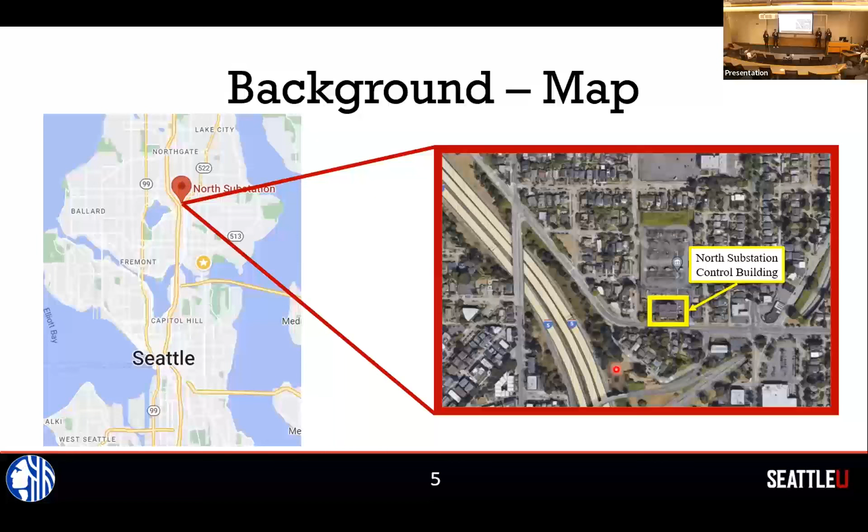For our project timeline, during the fall quarter, we completed our preliminary calculations, which include the weight takeoffs, center of mass, and center of stiffness, as well as our ASCE 41-17 Tier 1 checklists. During the winter quarter, we completed our mitigation developments, which include reevaluating our deficiencies, design mitigations, and evaluating the mitigations. During spring quarter, we completed our draft mitigation solutions, did our construction cost estimates, and finished our final report.

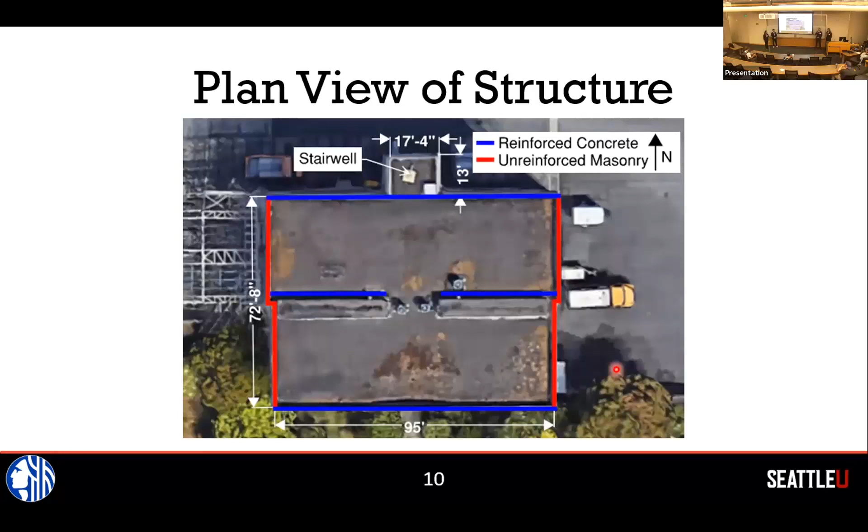Next, we're going to take a little look at the building. So starting here with the plan view of the structure, we took this from Google Earth. It's roughly 95 feet wide by 72 feet, 8 inches long. And in blue are reinforced concrete walls, the north, south, and middle walls. And they're the lateral force resisting system for forces developed in the east-west direction. In red are unreinforced masonry walls, the east and west walls, and they're the lateral force resisting system for forces developed in the north-south direction.

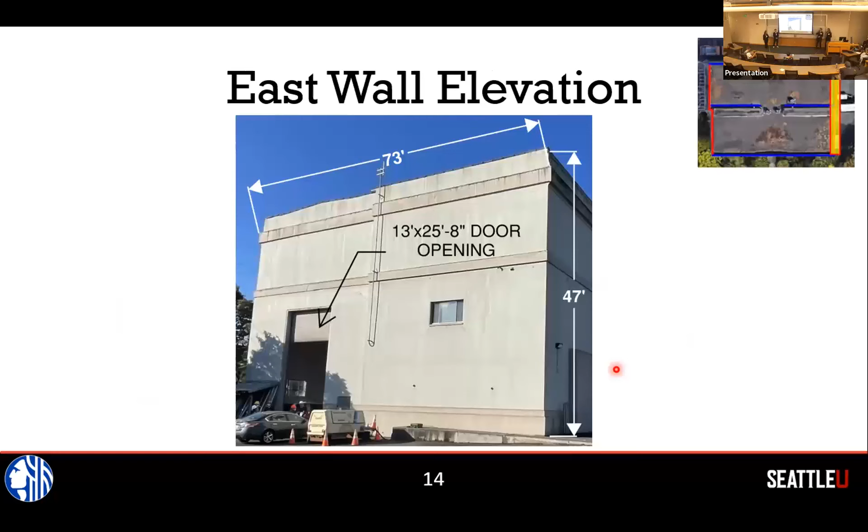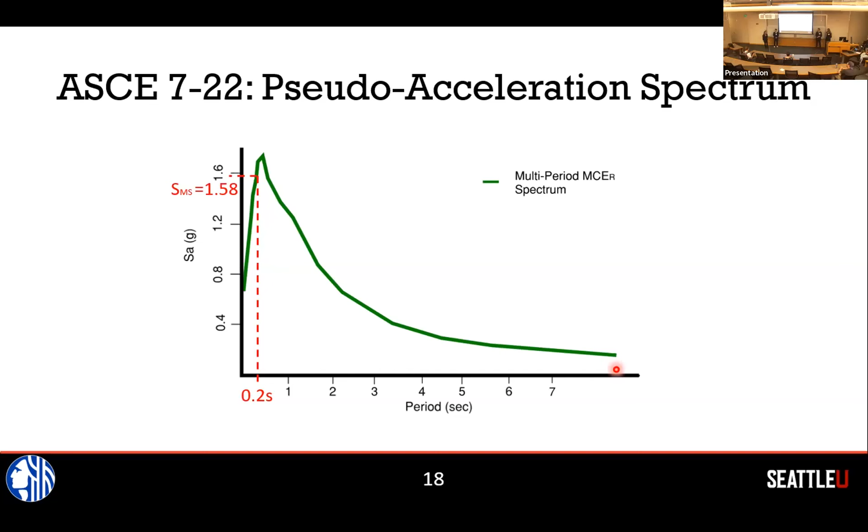This is our ASCE 7-22 pseudo-acceleration spectrum, and we're using this to find the spectral acceleration, a value that can be used in an equation that resembles force equals mass times acceleration, otherwise known as Newton's second law. So this is the multi-period maximum considered earthquake for a life safety event. We calculated our period to be 0.2 seconds and found our spectral acceleration to be 1.58 G. We'll be using this value in the next slide to calculate our total base shear.

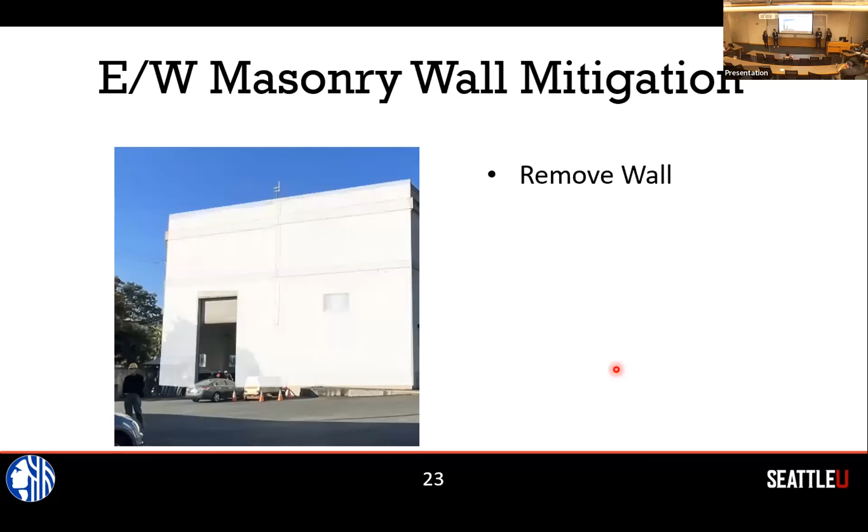To start off our mitigations, we have the east and west masonry wall. Unreinforced masonry is brittle and prone to out-of-plane failure and is not ideal during seismic design. So to mitigate this, we are going to remove the wall and cast the new shear wall on the north side of the building or install new brace frames.

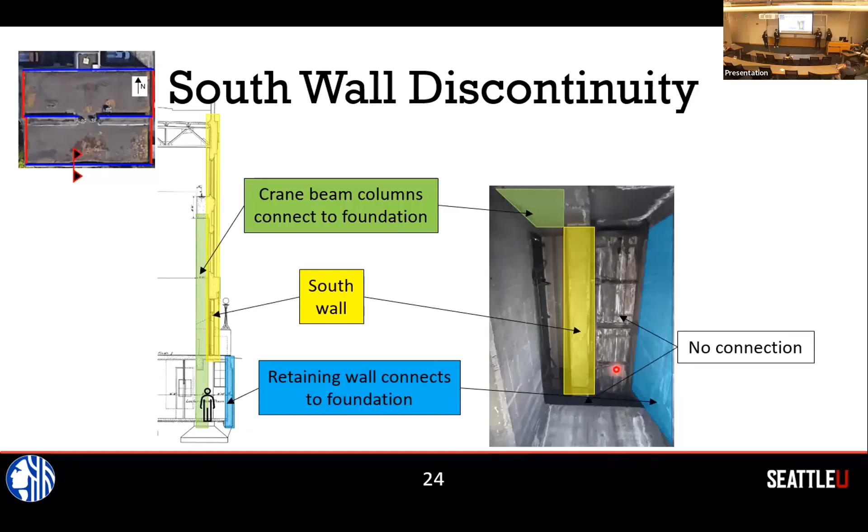So what we propose is looking at these crane beam columns, which connect both to the foundation as well as to the south shear wall. And we did some calculations to see if they could withstand the forces developed in the south wall. We found that they could not in their current form. So we decided to propose enlarging them to what you can see here.

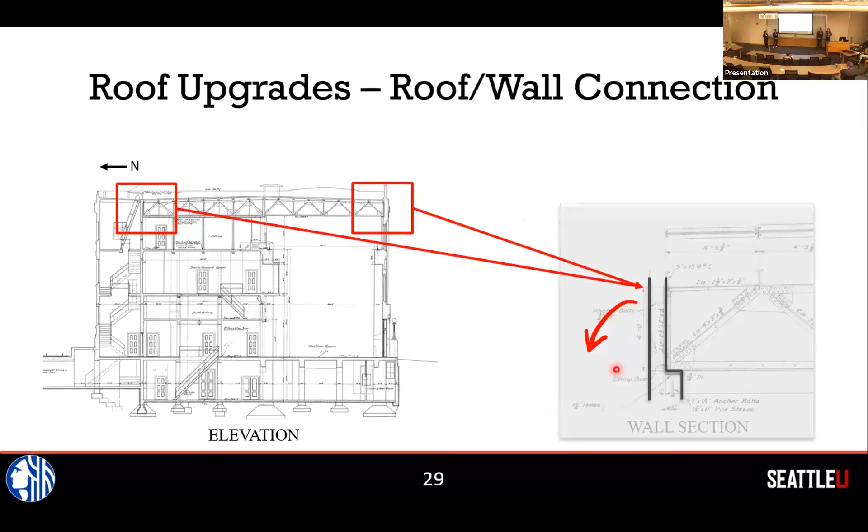Our second upgrade suggestion at the roof is at the roof to wall connection, specifically the roof trusses to the exterior walls. So when that earthquake hits, we expect these walls are at risk of out of plane failure, as that truss connection is not up to the current codes for our design earthquake. So we recommend installing an anchor at each truss to help strengthen that connection and mitigate that method of failure.

Our third upgrade suggestion is again at the diaphragm. So when that earthquake again acts on the building, it encourages that concrete roof slab to bend, which is shown exaggerated here, and that creates tension in the concrete with the highest tension at those extremities. And concrete doesn't do very well under tension. So this is what that roof section looks like currently at the exterior walls. And to increase the tension capacity, we recommend installing chord reinforcing. So we have designed a channel that is anchored to the roof to achieve this.

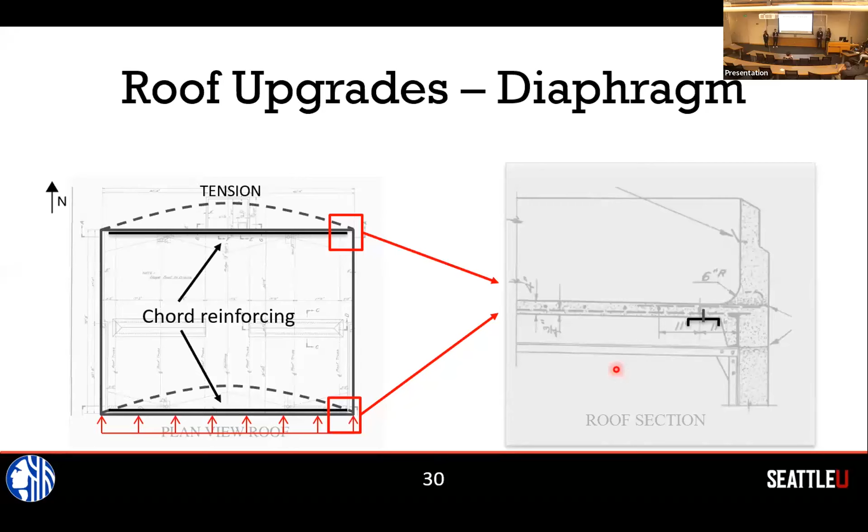So following the completion of our mitigation designs, we did a cost analysis that included unit costs, material quantities, as well as labor costs. This did not include the cost of any further design, which we have discussed with Seattle City Light would be necessary in order to implement our suggestions. And here's just a sample cost analysis for our largest mitigation suggestion, which is that east and west wall upgrade. These values were given to us by our liaison as relatively standard values that Seattle City Light uses that cover both the cost of the materials as well as some of that construction or labor costs.

So at $500 per cubic yard of poured in place concrete, the concrete shear wall would come out to $150,000. And then for that brace frame option at $3 per pound of steel, the bracing would come out to $110,000. This doesn't include the hardware or connection costs, as that was out of the scope of our design.

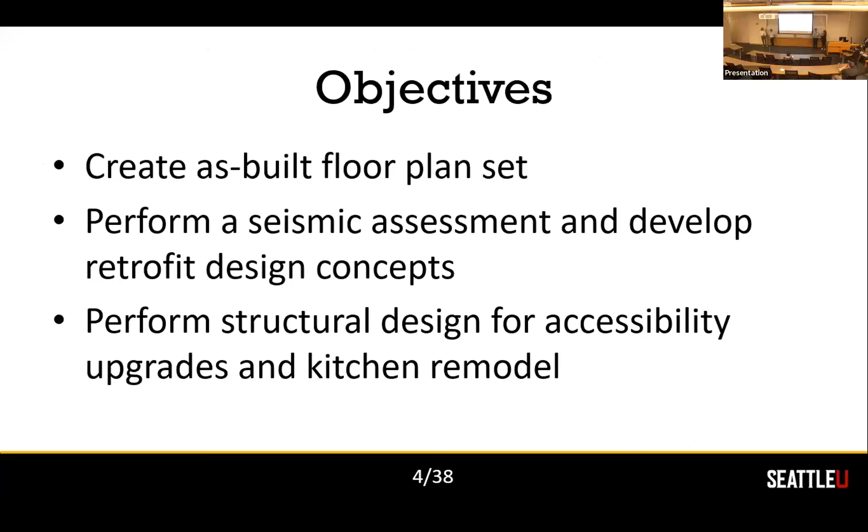Now let's look at the site overview. Camp Korey is an adaptive year-round nonprofit camp for children and their families living with life-altering medical conditions, located about 60 miles north of Seattle. The building we worked on is called Fisher Lodge, located in the southeast corner of the Camp Korey property. It was a student project from UW Architecture, built in 1968. In 1994, the annex building was added to the north side of the lodge, which brings the total usable area up to 7,000 square feet.

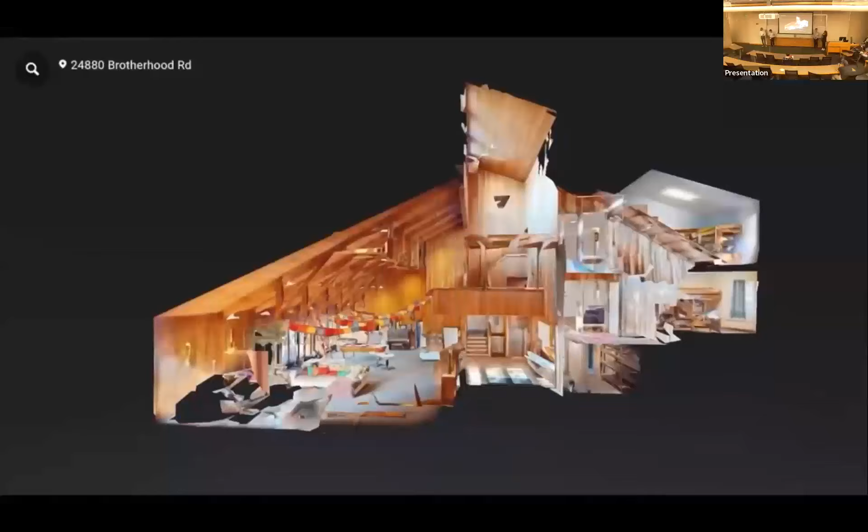We start off with the south facade of the building with the main entrance. Moving to the west side of the building, we have the annex on the left side, along with the main floor on the right side. Continuing to the north side of the building, we have a better view of the annex. We have the north facade shown previously, and the residence floor right behind that. Continuing to the east side, we can see the residence floor with all the bunk beds right now, and the east entrance right there too.

Currently Fisher Lodge is used mostly for storage space, a gathering area, and housing for the volunteers. For the future, Camp Korey expressed their plan to provide more space for campers and host more events.

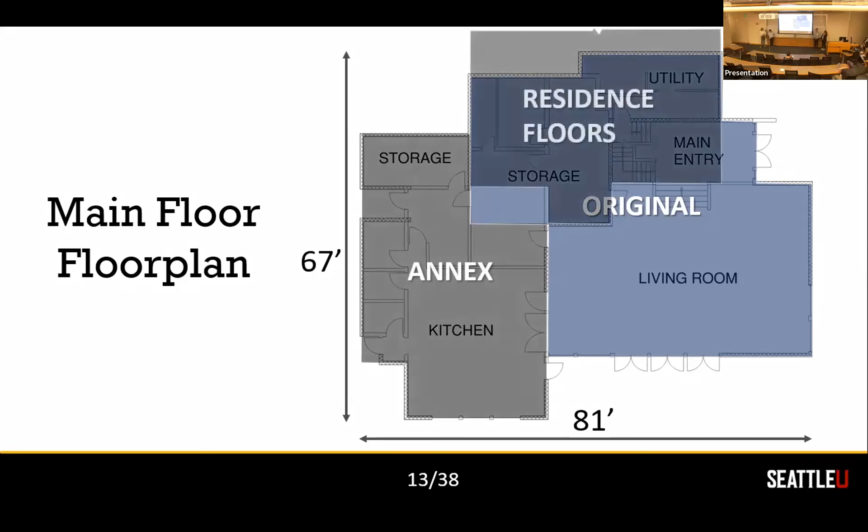So throughout this project, we used a variety of codes and standards. For our seismic assessment, we followed ASCE 41-17, the seismic evaluation and retrofit of existing buildings. We also got some design loads from ASCE 7-16, and we made sure that our upgrades were in compliance with the International Existing Building Code, which takes precedence in Mount Vernon. For wood member capacities for analysis and design, we used the American Wood Council National Design Specification.

If we found them to still be deficient for the seismic loads in Tier 2, we created a retrofit design concept. At the same time as our Tier 2 process, we were doing structural design for non-seismic building alterations and also some architecture and drawing work.

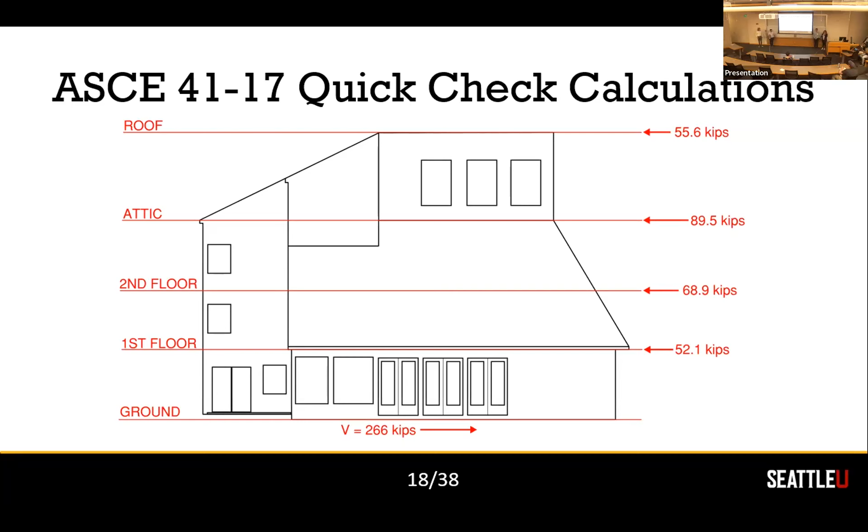And then the story forces increase as we get higher above the ground level, except for at the roof where the weight is very low, so it decreases again. So after our Tier 1 checklist and some of the quick calculations, we found some deficiencies and we moved on to our Tier 2.

Another deficiency item that we identified was the wood sill bolts checklist item, upon which on our site visit, we did not observe any positive connections between the wood sills and the foundation of the building, which is critical for resisting lateral forces.

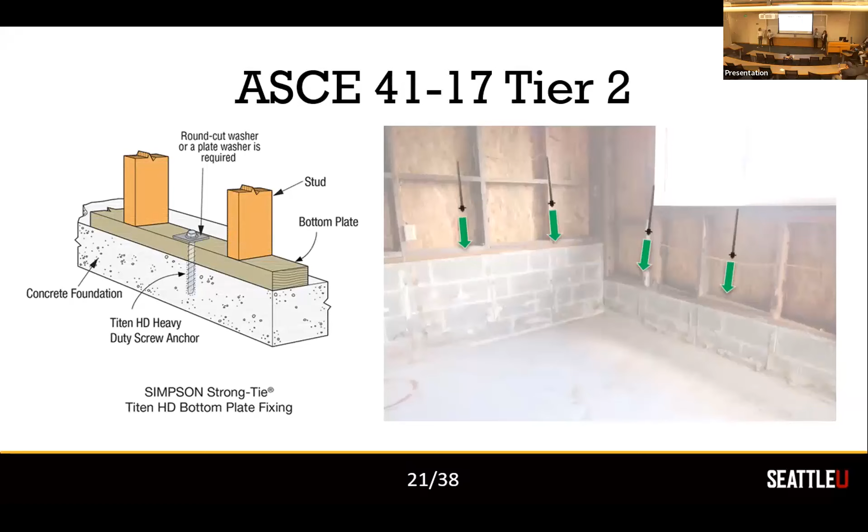So to design these anchors per ASCE 41-17, we took each wall's respective shear capacity and used this information to model anchors in the Simpson Strong-Tie Anchor Designer program and found that Titen HD screws of 3/4 inch diameter, 4 inches of depth, spaced at 3 feet on center were sufficient for resisting our loads.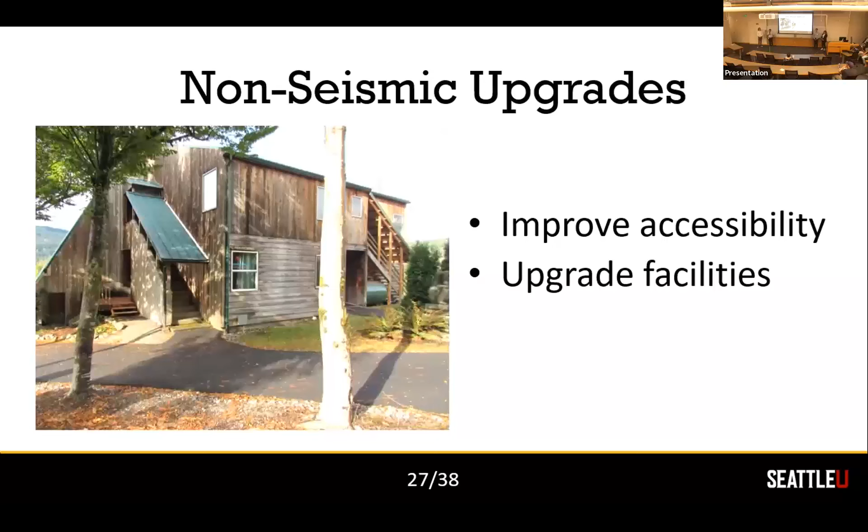So now we'll be moving on to some of the non-seismic building upgrades. So as mentioned prior, Camp Korey has interest in wanting to also improve the future use of Fisher Lodge. And to make that happen, it entails both improving the accessibility of the structure as well as also upgrading some of the current facilities. And this was done in close coordination with MG2.

And then finally, also there's a small storage room down there in the bottom left, where we're going to remove the walls and doors and convert it into a small breakfast nook. And then to allow some natural light, we're just going to put in a window through that exterior wall.

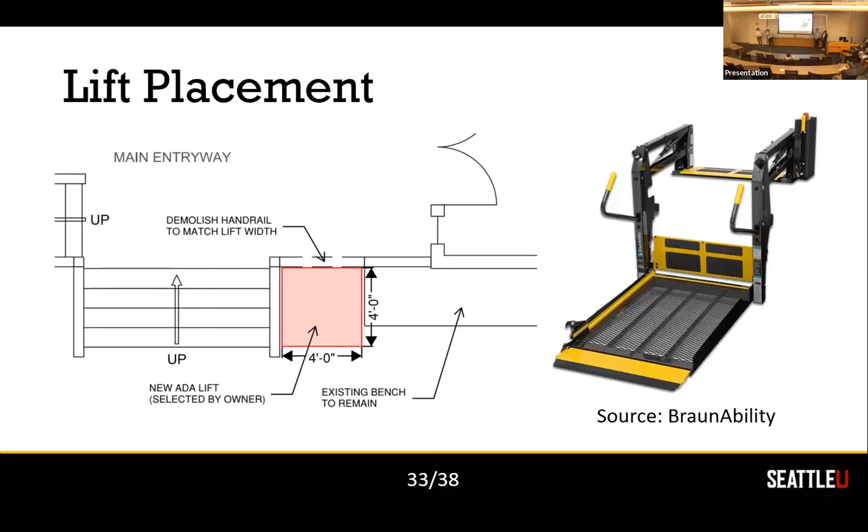They estimate it would be an 8-week duration with 6 full-time laborers. So labor would cost around $170,000. Equipment and materials would cost around $150,000. There would be $11,000 in supplier costs and $35,000 paid to subcontractors, bringing the total to just under $370,000.

So we have just submitted our final report to Camp Korey, and in that report, it included a series of plan sets we developed in AutoCAD. These plan sets were our as-built plans, our architectural renovation plans, our demo plans, as well as our structural plans with retrofits. Also, we'll be providing our ASCE 41-17 Tier 1 checklists and Tier 1 and 2 calculations to support our suggested retrofits.

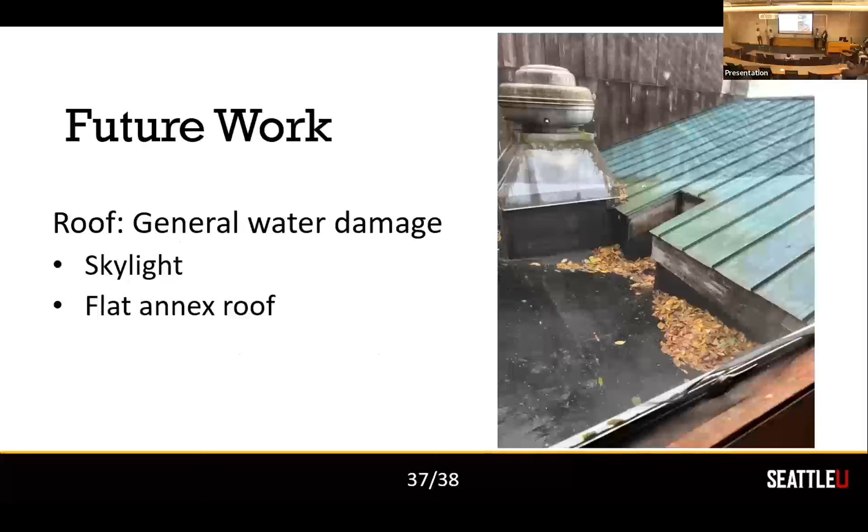Although our project is coming to an end, there's still some work left to be done. Isaac, the facilities manager at Camp Korey, had brought up an issue of general water damage due to the complex roof structure of the Fisher Lodge building over the years. This water damage is occurring in a skylight above the main lounge room due to seepage and in the flat annex roof due to clogging. We did not address this issue and it will require further investigation.

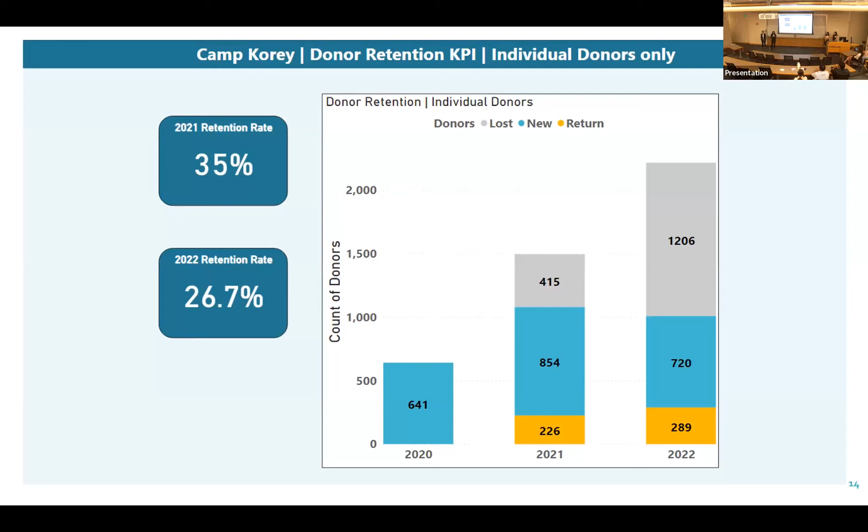Thank you, Radhika. Since we could see that only 25 to 35% of donors in the past continue to contribute in the upcoming year, there's a need to understand how involved the donors are with the organization. So we have come up with a metric called engagement score. Engagement score is the most valuable metric to measure the level of involvement and interaction of individual donors with Camp Korey's mission, program, and initiatives.

We followed a 3-step process to calculate the engagement score. At first, we worked with Camp Korey to understand the factors to identify how involved the donors are with the organization. Next, using those factors, we calculated the engagement score. Once the engagement score is calculated, we built a machine learning model to predict how engaged the donor will be in future with the organization. The measure and the model are really important and helpful for the organization to assess its impact, identify its areas of strength, and develop its strategy to further engage and extend its reach.

So let's see how we calculated the engagement score. At first, we calculated the donation score, which is nothing but a metric to measure the level of financial support provided by the donor to the organization. Next is the volunteer score. It's another metric to measure the level of involvement and the impact of volunteers in supporting Camp Korey's program and initiatives. Engagement score is then calculated by incorporating both these scores together by giving an equal weightage.

So in donation score, we consider variables like the total amount they donated, how frequently they contributed, did they donate during any special events, the recency of donation, and how consistently they've been donating in the last 2 years. For volunteer score, we consider total hours they volunteered and how often they come to volunteer. These scores are calculated by assigning weightage to the variables based on the organization's priority.

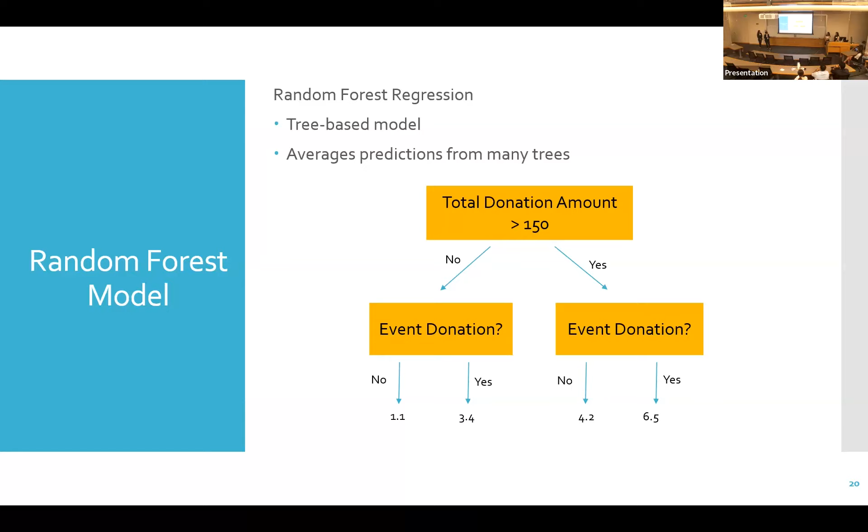This is just for one tree. We have many such trees in the random forest algorithm, and each tree makes its own predictions based on different conditions. And the final prediction is calculated by considering the predictions of all the trees and averaging them.

The second model that was developed was using neural networks. It is a machine learning model which is inspired by the way the human brain works. It consists of multiple layers. The first is the input layer through which the data is fed to the network. In between, we have hidden layers which perform computation and learn the patterns in the data. And the last is the output layer, which gives the final prediction. A neural network uses neurons for transmitting the information, and these neurons have weights associated with them. The neural network adjusts these weights while training to improve the prediction.

So the model's performance was evaluated in terms of root mean square error. It is a measure that represents the average difference between the actual and the predicted values. For the random forest model, we got a root mean square error of 1.9, whereas for neural networks, it was 2.14. This tells us that the random forest model has performed better than the neural networks since the difference between the actual and the predicted values is less. I'll pass it on to Leah for conclusion.

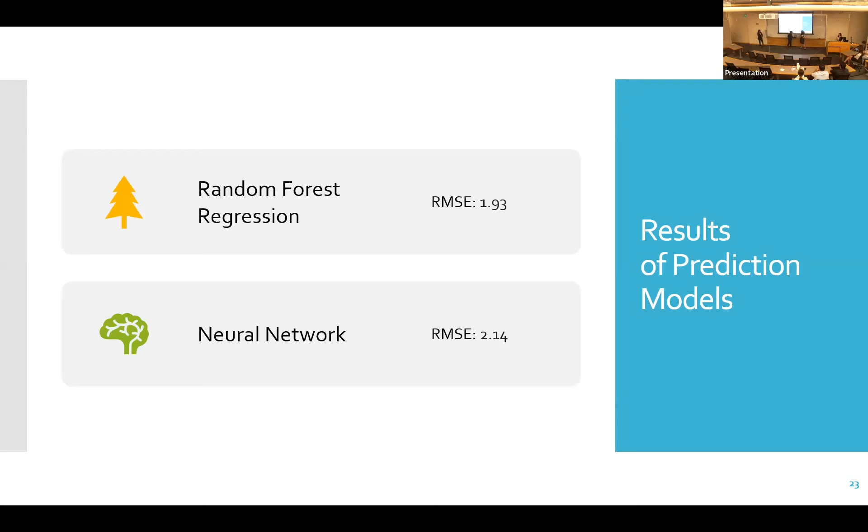Thank you. Yes, in conclusion, we wanted to just discuss some things that we feel might benefit Camp Korey from our work today. First, we believe by identifying those donors that had incorrect contact information, they will be able to go in, update those records, and hopefully be able to retain those people better. Additionally, our Power BI analyses, we believe, will help them to develop better, more efficient fundraising strategies. And finally, our work on donor engagement scores will hopefully help them to not only identify who is engaging with this organization or who's not, but also predict someone's engagement into future years.

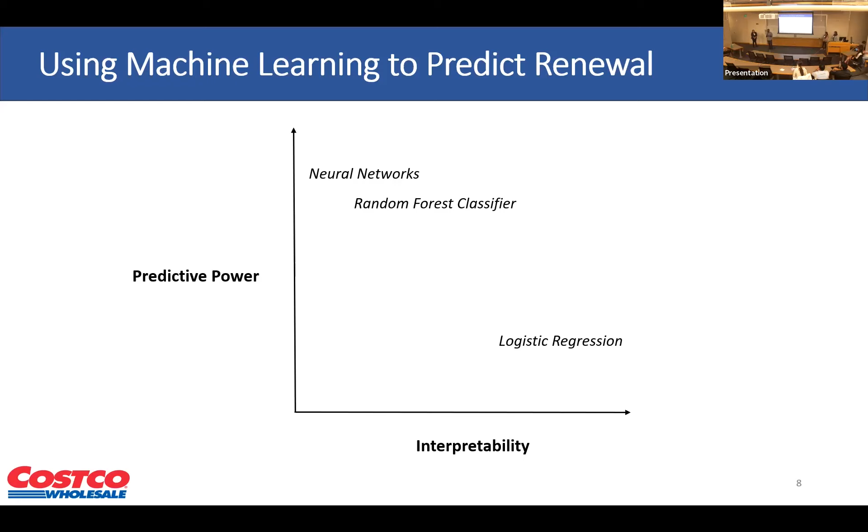So after training and tuning all of these different models for our problem, it turned out that logistic regression had pretty much the same accuracy as neural networks and random forest classifiers. So we decided to go with logistic regression models because these are more interpretable and can probably help Costco out because of that. So here we're going to just go into logistic regression a little bit. Just as a note, all of the numbers you're about to see are not real numbers. They're just for demonstrative purposes.

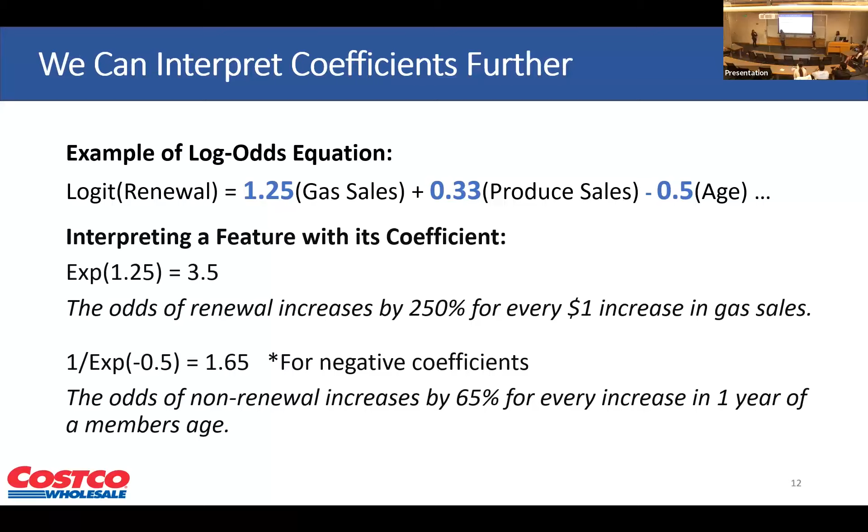Yeah, so after slicing and dicing data, trying different features, combinations, and also trying to fit different models, we concluded that there is no one model that would be perfect in predicting renewal and non-renewal. And considering business needs of Costco marketing team, we decided to move on and give them 2 models. First would be for low-cost channel, for example, emailing, when you don't need to spend much money. Second one would be for high-cost channel, for example, print mailing when you have a particular fixed budget.

With the low-cost model, our goal would be to capture as many non-renewing customers as possible. With our high-cost model, we'll try to increase our accuracy of predictions and we'll focus on more likely non-renewers. So with each model, we have some trade-offs. With the model for low-cost marketing, we're capturing as many non-renewing customers as possible. However, our accuracy is lower than with our other model.

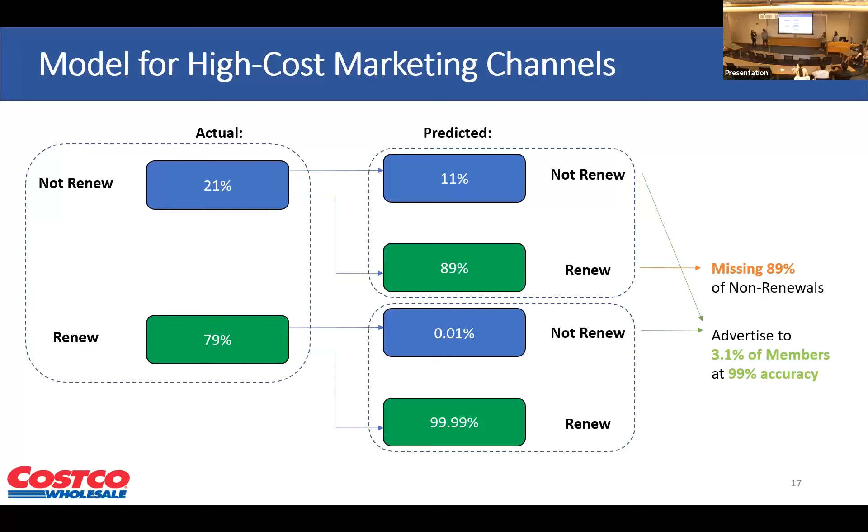Just to summarize those 2 models, with our low-cost marketing channel, we're capturing more people, 93%. With our high-cost marketing channel, we're capturing 11% of them. However, for low cost we end up advertising to 83% of members with 24% accuracy. And for high cost marketing channel, we're advertising to 3.1% of members at almost 100% accuracy.

So Swati will go into details of our top predictors. Thank you, Fidan.

After running the logistic regression model, we have narrowed down to a list of important features. We can see that age has a prominent role in our model, indicating an inverse relationship as it has a negative coefficient. We can also see that group NN and frozen fruit quantity also have a negative coefficient value, again indicating an inverse relationship. We can see that number of transactions, downgrade, upgrade status, and beer wine quantity have a positive coefficient value. And using these features, Costco can actually acquire customers to sign up for their membership.

Till now, we have seen the retention model and its important features. We have seen a few issues in building an acquisition model. We only have sales transaction data of members and retention model features. We cannot use these to build an acquisition model because we require entire population data to capture non-member details. And also we cannot completely rely on poor third-party demographic data.

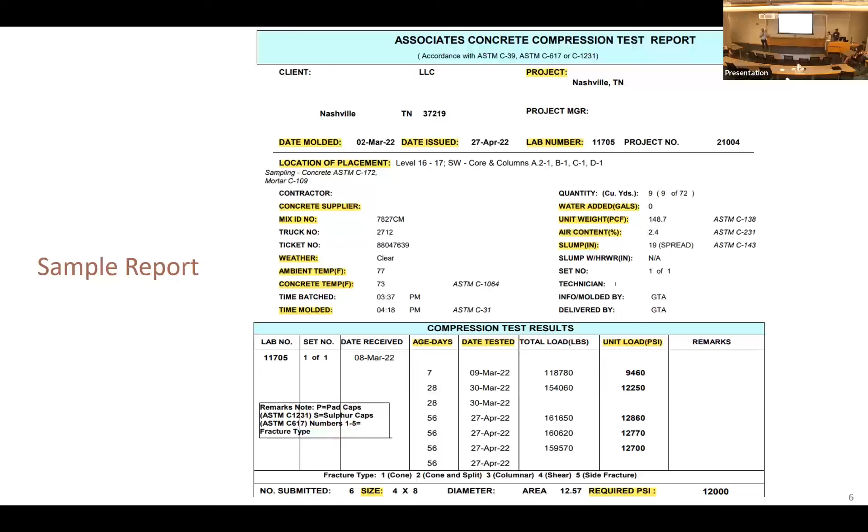PDF reports are a common way to look at the data, but they can be most difficult to extract data from. It is because PDF reports are unstructured, as you can see on the screen. It doesn't have a consistent way to organize the data. To address such challenges faced by DCE, we divided our solution into two parts. On the top is the data curation system, on the bottom is the predictive system.

Let me walk you through how the data curation system works. Let's imagine you're an engineer at DCE working on a new site and have just received the reports from your partner lab for the site. Now you open up an Excel file, put the location of those reports along with other information like project number, longitude, and latitude. Once that file is saved, our data scraper written in Python will extract all the important information and export it into a clean Excel file.

This Excel file is defined in a certain schema, which has all the primary keys and secondary keys. And it's ready to be ingested into any relational database or any analytics tool you might want to use. Next, our predictive system. It has two components, a predictive model and a presentation platform. When we have the clean data from the data curation system, our predictive model will be able to predict unconfined compressive strength for 7th, 28th, and 56th day.

After that, a presentation platform built on Python will be able to visualize the results and also provide more information on the factors affecting concrete strength. Let's learn about the predictive model. We use an artificial neural network to predict concrete strength. Artificial neural network is inspired by the human brain.

It is made up of layers of interconnected neurons. The first layer takes the input data, the last layer produces the output. In our case, that's unconfined compressive strength. The intermediate layers are known as the hidden layers, where the computation on data is performed as it passes through the network. Each neuron has a weight attached to it, which decides how important that is. When we train the neural network, the weights are updated to give better prediction. This process is called backpropagation, and it starts all the way from the output layer, computing back to the input layer. Let me explain how this works.

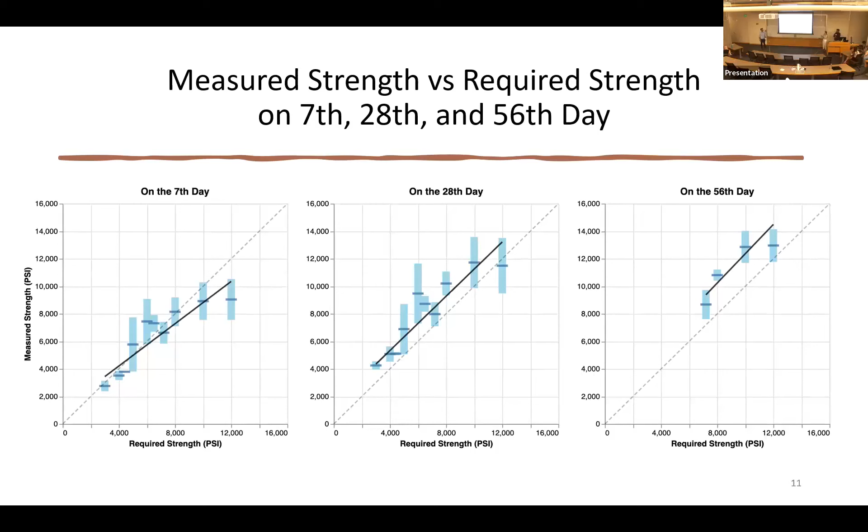We also have blue ticks, which are the mean for each required strength, and the bars indicate 1 standard deviation from the mean. So over here, we can see that only some specimens with very low required strength can reach their required strength on the 7th day. And then we can expect most of them to reach their required strength on the 28th day, except for specimens with required strength of 12,000 PSI. After that, the specimens continue to cure and attain higher measured strength, and we can expect all of them to reach their required strength on the 56th day.